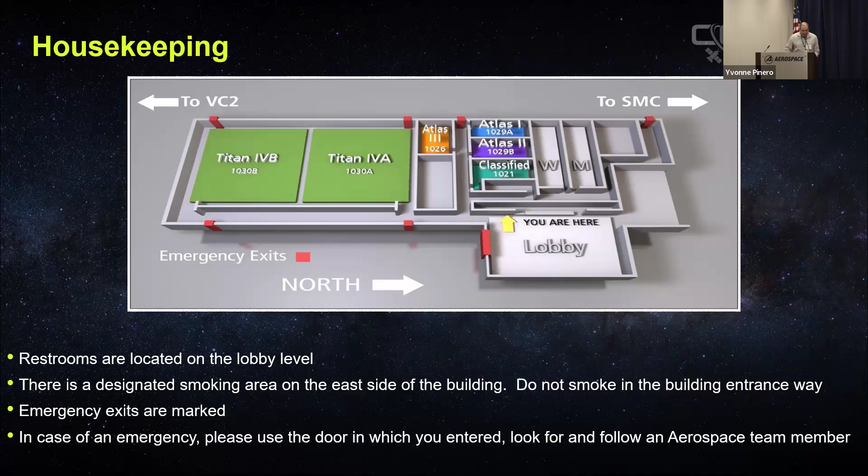All right. We are Cosmic, and this is the Cosmic Capstone Challenge. This is the final showcase, starting today and running through Thursday. My name is Jacob Rome. I've been managing C3 for the past several years, and let's roll. All right, next slide.

Okay, so introduction, ground rules. We're excited to have you, whether you're online or in the room. If you need anything or have any questions, post in the Zoom chat, or you can reach out to myself, Alec, or Rachel. Rachel will also be very helpful and keep posting links in the Zoom. If you're attending in person, please be respectful during the other presentations, even if they're not in the room here. We should not be having conversations in this room. Next door here in El Segundo, there's an empty room if you want to do that.

Okay, so there'll be a lot of people attending eventually. We're going to limit it so only presenters and judges may come off mute. So if you're an audience member and you have questions, put the questions in the chat. If you're a judge, you can come off mute and ask or raise your hand. Others are encouraged to post questions in the chat, and we're going to stay on schedule. Unfortunately, we had a couple teams drop out at the last minute. We're just going to leave those times open. If one presentation finishes fast, we're going to wait till the assigned start time for the next one, since a lot of people have this on their schedule. Okay, next slide.

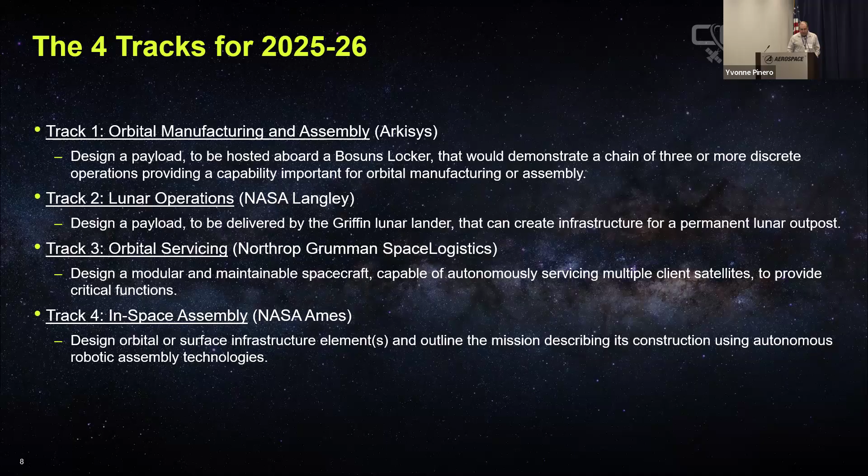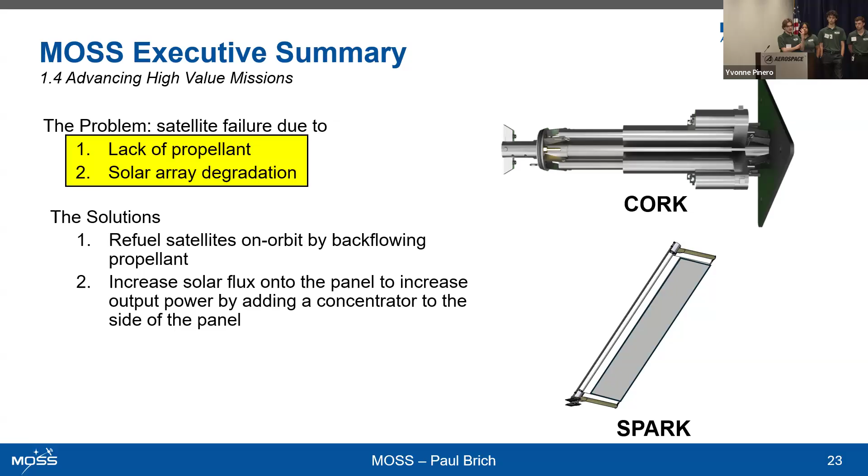We are trying to propose two solutions to service these issues. One is the Core Orbital Refueling Kit, or CORK, and the second is the Solar Panel Augmentation Reflector Kit, or Spark. CORK plans to mount to the engine of the satellite and backflow propellant through the engine to the fuel tank to refuel it. Spark is a deployable reflector shield that can be placed on the client's solar panel to reflect more sunlight onto the panel to produce more power.

This is an illustration of our proposed mission. We plan to launch, get into geo orbit, maneuver to the client, and perform both servicing operations.

If our mission has us servicing multiple satellites, we'll perform a maneuver to get to the second client and perform these servicing operations again. The moment we run out of Sparks to deploy or propellant to refuel the client, we will then move safely into a graveyard orbit away from the clients.

These are two animations of the servicing operation. On the left, we have CORK refueling the apogee kick motor of the GOES-R, and on the right, we have MOSS mounting Spark onto the solar panel and deploying it out.

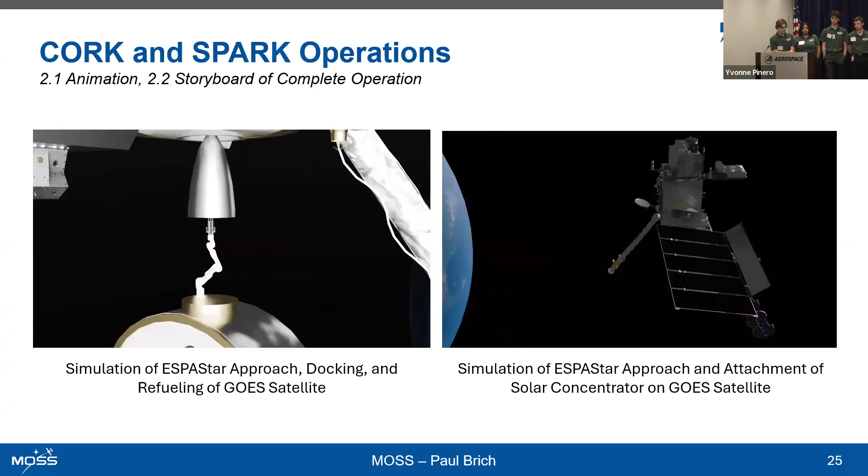Now I will pass it over to Chanel to talk a bit more about CORK. Thank you, Paul. I'm going to be going over the Core Orbital Refueling Kit, CORK.

I'm going to go over the design history, the impact, the requirements, the operations, the innovation, and the risk and mitigation.

With the design history, there were many different concepts, but we decided to share these three today. With Drill B, the idea was to reach the client's spacecraft and drill directly into it. We didn't love this idea since it would damage the other spacecraft, and we want to do it in a non-invasive way.

The second option was the Northrop Grumman MEV 2.0. They attach to another spacecraft and give it a new attitude control system. Yes, it does expand the lifespan of these satellites, but it doesn't solve our issue about refueling in space.

The last concept we want to share was the RAFTI 2.0 by Orbit Fab. It's designing a refueling interface to install before satellite launch, so it only solves for future satellites and doesn't address our current issues with satellites already in orbit.

For the trade studies, we had many different concepts, but we focused on showing these three today with CORK. We looked at damages, complexity, manufacturability, mounting, adaptability, and repeated use. As you can see, CORK won by 86%, mainly focusing on manufacturability. It's pretty good to manufacture, and the adaptability means it can be used on many different nozzles, not just for one spacecraft. We're able to adapt it to many different nozzles, engines, and spacecraft.

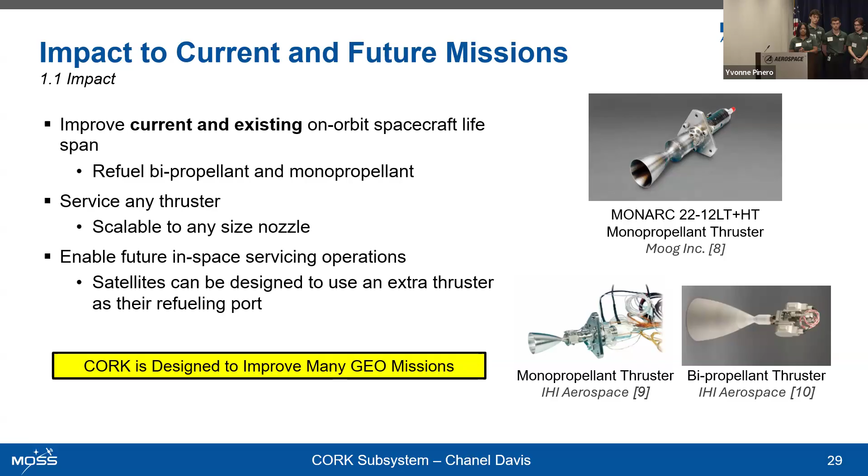Our Cork requirements, we have 8 of them, but our big main ones are 0.1, 2, and 3. We want to be able to backflow propellant through an engine without damaging the client's satellite, to do it autonomously, and to fit onto ESPAStar within the mass, power, and volume constraints.

Here's the operation of Cork and how it works. As you can see, there's docking and sealing. We line up to the client's engine, and once we are docked, we start backflowing the fuel.

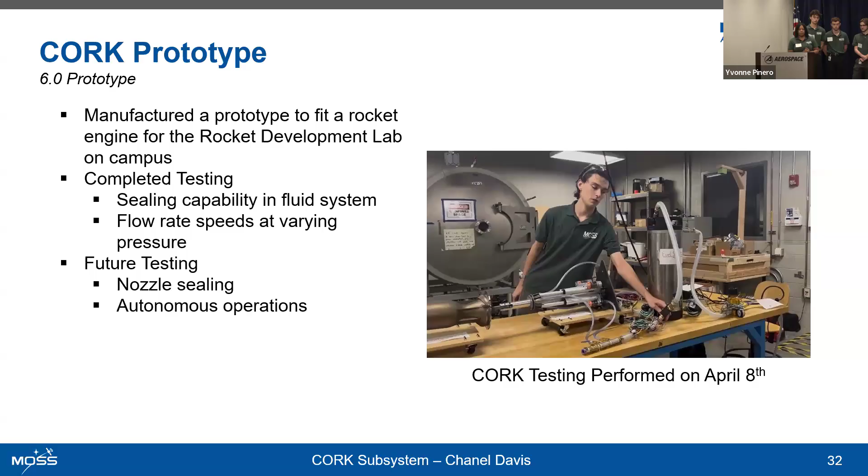Our core innovation is backflowing through the chamber, which is unheard of in space. No one has done it in space yet. So that's why our design is unique and different.

The catalyst integration is another innovation. The reaction rate of the hydrazine decomposition is minimized, and when the temperature is minimized, the mass flow rate is maximized. As you can see in our CFD, with the catalyst and the backflowing, it should work in space.

We have 4 risks, but the only one I'll address today is the catalyst reaction, because it caused pressurization. To minimize this from 4 to 2, we have our CFD simulations and future testing to see how that works. There are also 3 other hazards we addressed and analyzed, finding mitigations to eliminate the overall risk of our project.

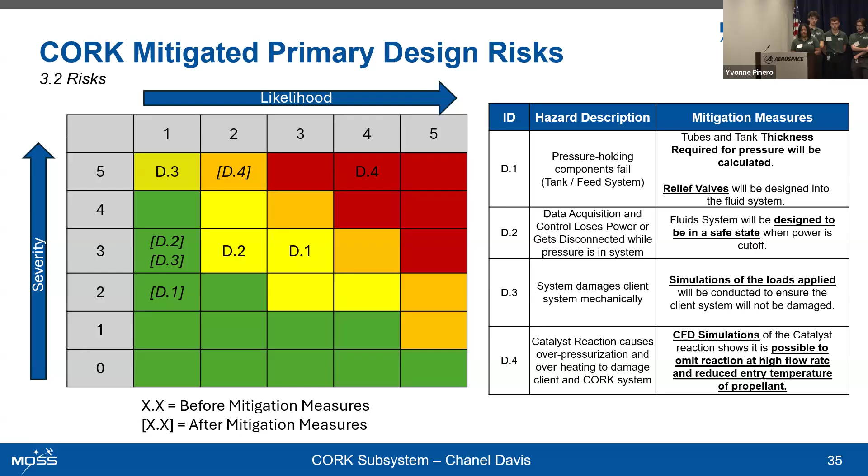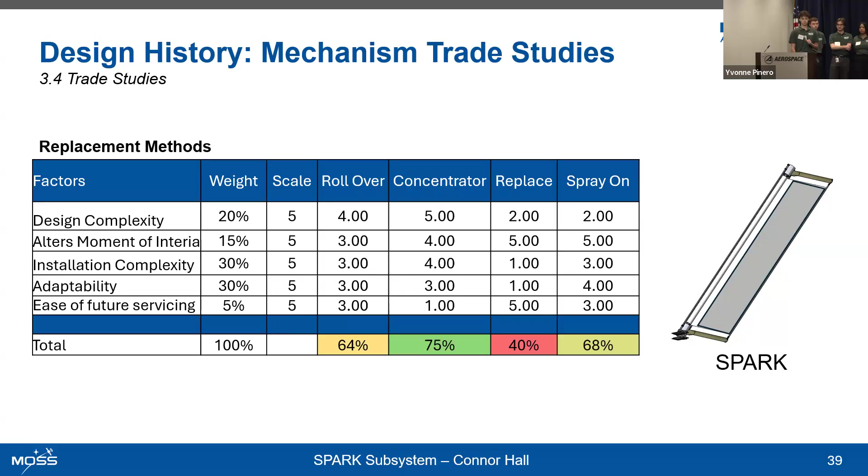So the Spark device would also be compatible with current and future geosatellites. It would also be easily modified to service different missions. So we could just change out the length, put on maybe a thicker roll, and it could deploy for a bigger array, for example. And then it would also increase performance without need to integrate into the power system whatsoever. So it would be a rather simple concept to mount on and actually get to work. Next slide.

All right, so some of the Spark requirements. We had a few main requirements. One is that we need to reflect at least an 11% additional light increase onto the solar panel. We also need to make sure that we don't increase their station keeping. We wanted to target around 5% of the actual nominal capabilities of the client.

And then we also need to make sure that we don't break the solar array whenever it's doing maneuvers, and we don't crush the solar cells that are on the actual array that we're mounting to. We also, much like CORK, wanted to integrate requirements to make sure that we could fit the volume, mass, and payload constraints in general for the ESPA-STAR satellite that we are hoping to use on MOSS.

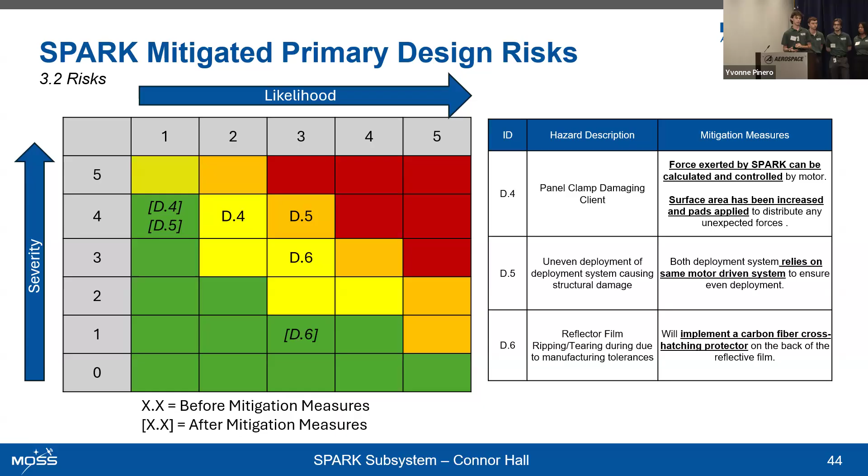For the uneven deployment, we did implement a common drive shaft between the 2 booms, so they will always deploy at the same rate. And then for the reflector film, we are going to implement kind of a carbon fiber or fiberglass weave on the back. So if a rip does start, it would be terminated at the intersection of the weave and the foil. Next slide, please.

So what are the next considerations for the Spark design? Well, we want to look more into the incident angle efficiency losses. So we want to propagate the client for each mission around the Earth and around the sun and find the average incident angle that would be hitting the solar array and then design optimally for that incident angle. So change our reflector mount angle to make sure that we're getting the best reflection onto the actual panel.

We also want to look more into our reflector material. Currently, we have aluminized mylar as our choice, but I believe that we can find a better reflector that would reflect the 400 to 1600 nanometer wavelength band that gallium arsenide panels like to absorb.

And then third is the heat degradation from increased sunlight. So we want to look into exactly if we do put more solar flux onto a gallium arsenide panel in space, how does that exactly affect the lifespan of that panel, and what does the degradation rate look like if we were to reflect more sunlight onto it?

And now next up is Brendan King with integration and feasibility. All right. Thank you, Connor Hall. And I'll be going on to a little bit more about how all this integrates within the overall MOSS system.

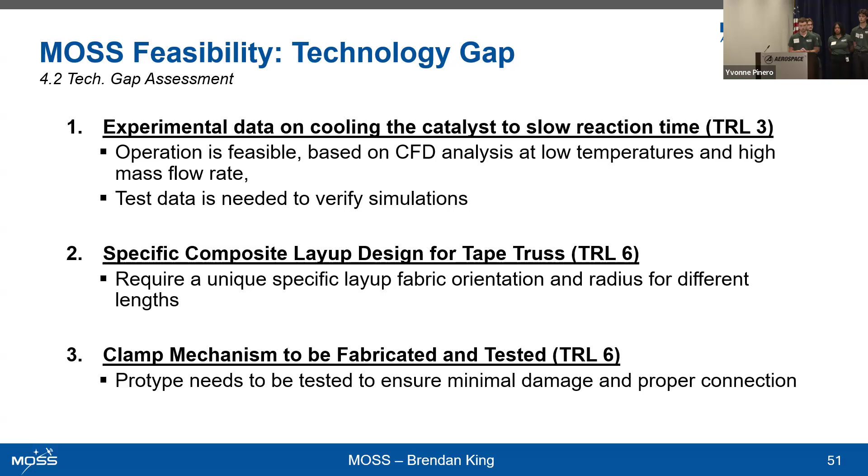And then as well as the clamp mechanism, we have to make sure that prototype is tested and built to ensure that we have minimal damage or proper connection with our client satellites that we are servicing. Next slide, please. In terms of our mission costs,

Next slide, please. And so how this compares to say a GOES-P satellite or GOES-R satellite, we come in at a savings of around $128 million. And so this is great because it shows not only our solution can save money, but it also allows that satellite to stay up in space longer, reducing the need for, say, sending up an entirely new satellite to replace that satellite. We can just directly go in there and service them and keep them up there longer, which definitely reduces the cost. And so we deem that our CORK and SPARK solution has potential to save the industry money as well. Next slide, please.

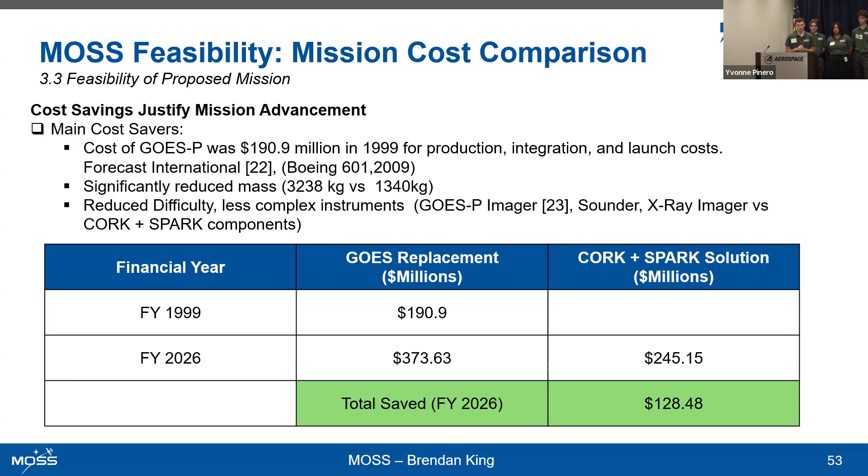Looking at our final summary. In summary, MOSS servicing will include our CORK and SPARK operations, which will tackle our rank 5 and rank 10 tasks of on-orbit refueling kit and solar panel augmentation. For CORK, we'll be backflowing propellant through the satellite thruster to refuel hydrazine fuel. We'll be able to service any GEO satellite that has a hydrazine thruster. And again, the servicing design has never been done before, so that's where our innovation really kicks in.

In terms of Spark, we'll be adding a reflector to increase our solar flux on degrading satellites. We'll service any GEO satellite that has a solar array. And a similar design has been proposed, but never been fully designed and implemented. Again, showing that innovation. Next slide, please.

In terms of our future work in our path to PDR, we plan to finalize client platform, specialized design inputs. For CORK, we want to complete our catalyst analysis and potentially get experimental results to support our findings. We want to perform space environment dynamic simulations to make sure that we are able to conform to our space operations in that space environment, which is very dangerous. In terms of Spark, we want to develop and test our deployment mechanisms and go through these other things that we have listed here as well, and deliver a full scope preliminary design review.

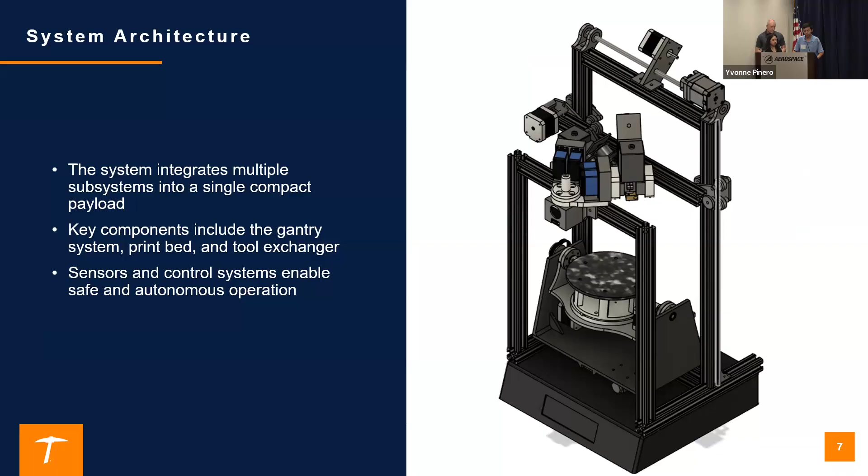Where's the control for this? All right, so

Excuse me. So a big inspiration for this is obviously additive manufacturing. Some of the processes that we chose, 3D print, wire embedding with the 3D print, and soldering, even though they are very similar processes, they do require different tool heads in order to make that happen. So we looked very hard into how we are going to change those tool heads. Of course, we wanted to come up with a very rigid design to eliminate any kind of slop.

So right here, we just kind of got a concept of how that would function, how that would work. Obviously, locking keys that would mate up with our alignment slots to pick up the tool off of our rotary exchanger. Then that rotary exchanger would swing the unused tool out of the way for our desired printing operations. Next slide, please.

There's just kind of an image of our gantry system, once again inspired by 3D printers out there. This is the backbone of our operations. We plan to have it run off of timing belts. And this portion of it is what is going to give us our translation in the X and Z axes. Next slide, please.

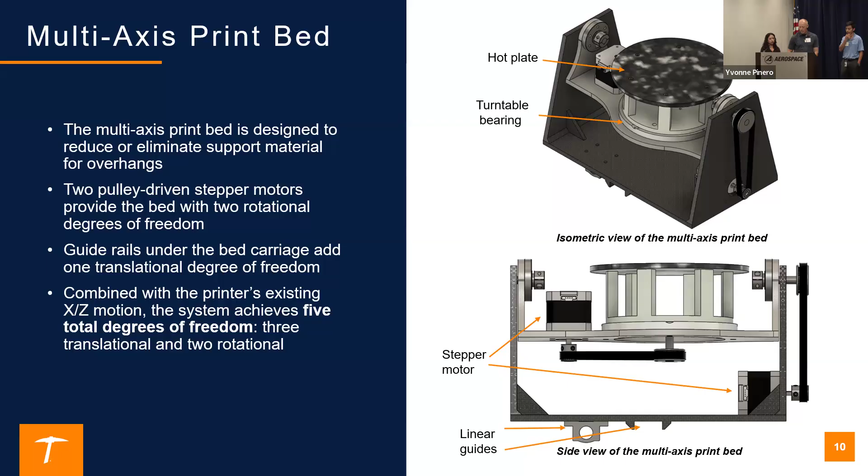The hot plate will be able to rotate 360 degrees. It also has a tilt mechanism, which we know from our CAD will give us at least 20 degrees of tilt, both positive and negative. So we think we can get some pretty interesting design geometries out of that. It also translates back and forth in our y-axis. Next slide, please.

The rotary tool exchanger, obviously the other important component here. Not only does it store our tools to keep them from floating around inside of the bosun locker, but it shifts them in and out. We wanted to make sure that this was designed pretty robust, and it's integrated. All right, next slide, please.

All right, so for our risk, we use kind of the standard model, likelihood versus consequences, to identify our risk with this entire system. They really focus into 3 main categories. One is thermal, temperatures and keeping that under control. Of course, the laser and keeping that in safe operating conditions, and then FOD.

We're looking at working with soldering. We're looking at using filaments for our 3D materials, and of course, the embedded wiring, making sure that's clipped and cut so we're not having any foreign objects floating around inside of the locker. We believe we can mitigate most of that through our testing on ground, in the vacuum, and with our next steps. All right, next slide, please.

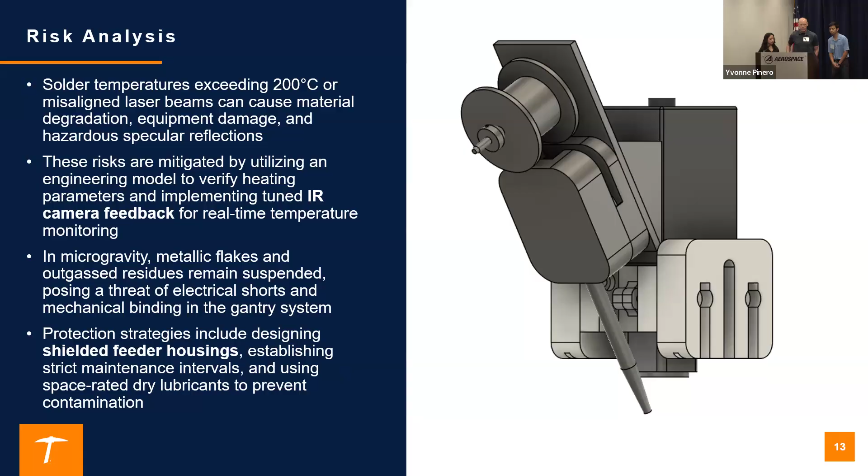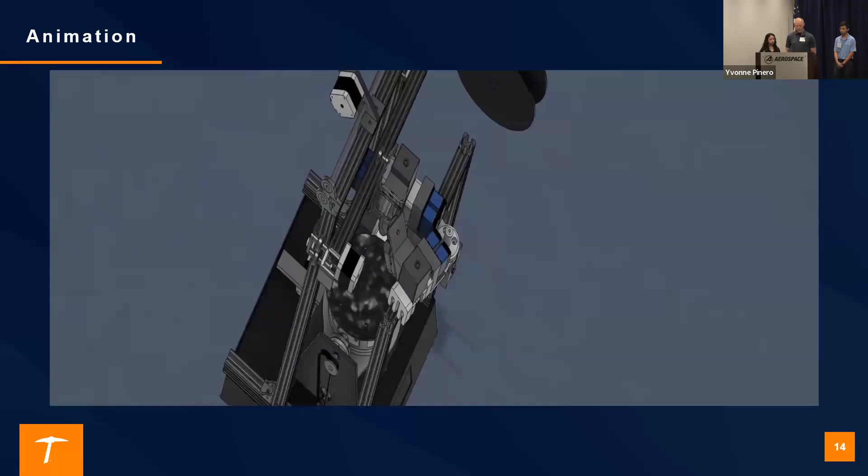We have an animation right here of the locker. You're going to see this thing spin around, and you'll notice our print bed rotating, bringing our tool head down to conduct its soldering operations. I tried to capture here an image of the trading of the tools.

Guess we're going through the animation one more time. All right, so this is the storyboard for our concept.

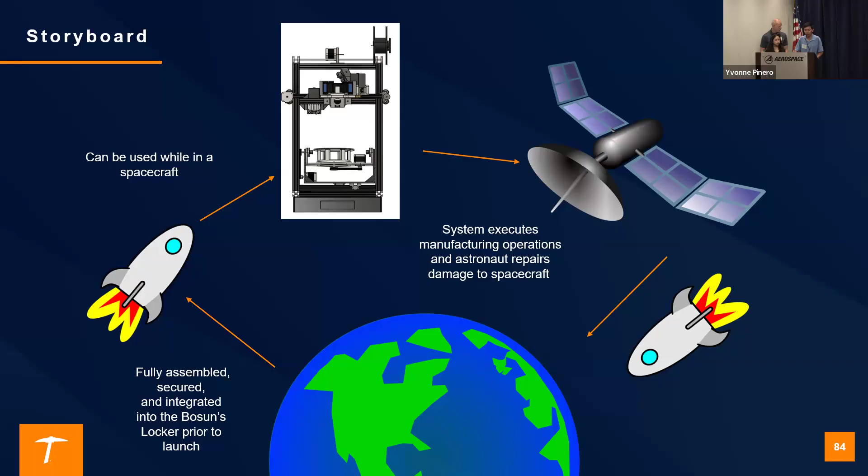While we're down here on Earth, we'll fully assemble and secure the bosun locker prior to launch with all the integrated subsystems. Then we'll launch it up in a spacecraft, and it can be used while in a spacecraft to produce any manufacturing operations - that could be damage to a satellite, damage to a spacecraft. We can also adapt it so we can host it on any hubs in space, like the ISS or other hubs. Then it can either stay in those hubs or stay in the spacecraft and come back down to Earth as well.

So this would be our results for this project. We have the thermal simulation, the power consumption, and also our FEA analysis.

So this would be our power analysis. We broke down our components and calculated the max power and the general operating power. One of our requirements was to ensure the system was within its limits of 1000 watts peak and 300 watts continuous. We calculated that the total maximum power was around 430 watts, and our general system power was around 150 watts, so we were definitely under those limits.

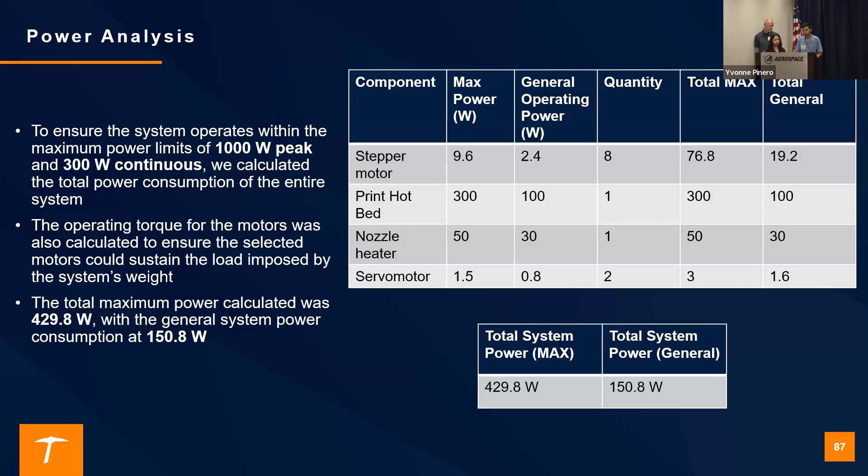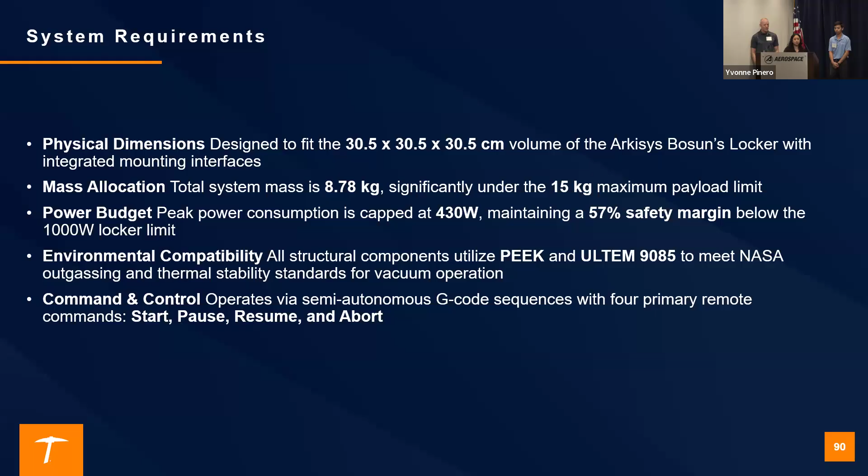For our trade study, we guided our decisions based on performance, reliability, and simplicity. For the structure, we decided to go with aluminum for strength and thermal performance. For thermal management, we decided to go with passive cooling to reduce complexity and power usage.

For our motion control, we use stepper motors to achieve precision without adding unnecessary cost or weight. And we developed a simplified rotary tool changing system to reduce mechanical risk. We ended up going with additive manufacturing, FDM, to minimize material waste and allow the complex internal geometries needed for integrated wire embedding.

For our control architecture, we enabled the system to operate reliably and autonomously. At a high level, we used dual controllers set up to handle motion control and processing efficiency. Our system integrates real-time sensor feedback to maintain precision and prevent errors during operation. It operates semi-autonomously, executing complex tasks using simple command inputs, and we designed it with separate power systems for stability and standard communication interfaces for monitoring and data transfer.

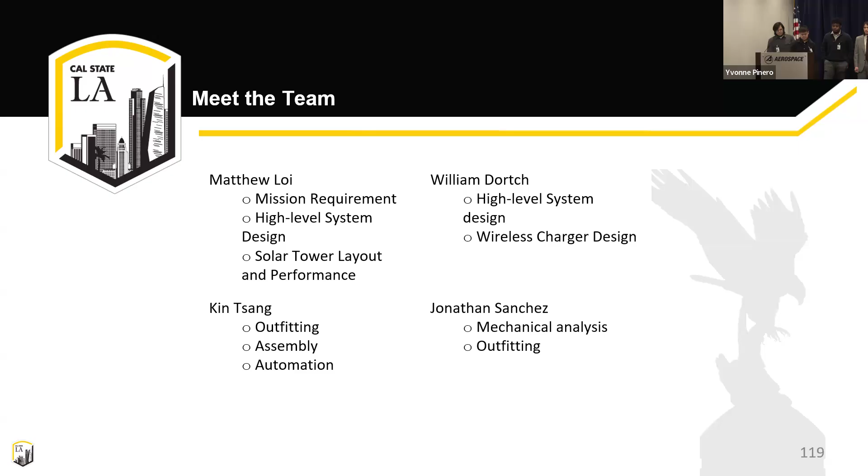So to start our presentation, we'd like to briefly go over a summary of what we're going to be talking about. For one thing, we'd like to talk about some problems we want to address, mainly that right now the Artemis missions on the lunar surface are mainly based on trying to extract resources and convert them into reusable energy sources, or turn them into air or fuel.

What we're trying to target is the short operational and mission time of exploration rovers on the lunar surface. We want to address the fact that these rovers will have to enter extremely deep craters where there's no visible light at the bottom. We're also addressing the fact that solar panels currently degrade pretty quickly on the lunar surface due to dust accumulation.

So our solution is to autonomously assemble a structure to generate power and store energy for long-term use, which will then be utilized by a wireless charger to charge rovers.

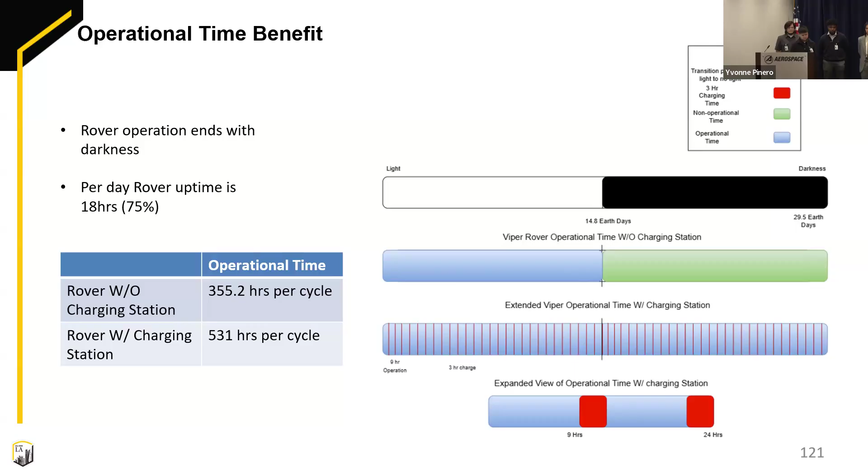To go over some benefits of our system, using NASA's Viper rovers as a baseline: they are currently self-reliant on a solar panel system. During the lunar cycle, when we eventually lose sunlight, the rovers essentially enter a hibernation state until the next period of sunlight when they can operate. Our proposed method of generating and storing power allows us to increase operational uptime to approximately 18 hours every Earth day, a 50% increase over the Viper rovers' current uptime of 12 hours.

Next, we'd like to address some locations and environmental issues. For our project, we wanted to target the Shackleton crater. Due to the depth of this crater, there's essentially no light, known as a PSR, or permanently shaded region. We're going to be placing our project at location A, approximately 89.68 degrees south, 166 degrees west, which is a peak of eternal light, meaning it experiences more sunlight than every other place, with the longest period of darkness only being about 7 days.

Next, I'd like to go over the requirements of our project. These requirements were developed based on the Viper class rovers in terms of the total amount of energy we need to store and how much power we need to generate. Along with that, we've also considered environmental constraints, such as lunar dust accumulation.

All right, so our building block for this is going to be the ARMADAS voxel. It has a cuboctahedral configuration, 1 foot by 1 foot by 1 foot, so the overall volume is 1 foot cubed. To assemble these structures we use the SOLL-E, whose purpose is to transfer these building blocks to the robot, the MMIC-I, to go ahead and connect and mate them once we provide the code and structure design for it to get programmed and assemble these together.

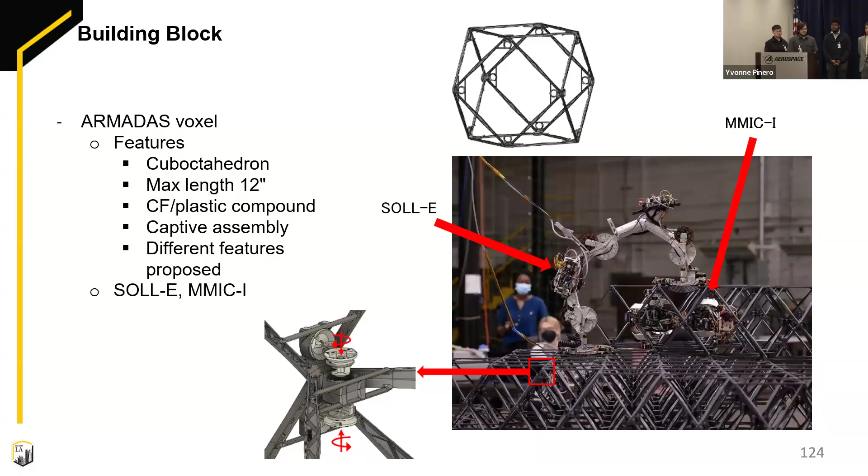So now I'd like to go over some trade studies on how we developed our project. First, the different battery storage technologies to store all that energy for the rovers to use. We compared different materials, but the most important one was lithium ion, as that's currently being used. We compared it against solid state batteries, lithium sulfur, and sodium ions, and found that the solid state battery was the most optimal solution due to its higher energy density, allowing lighter batteries that we could transport into space, along with its higher life cycle, meaning we can effectively recharge and discharge it twice as many times as lithium ion.

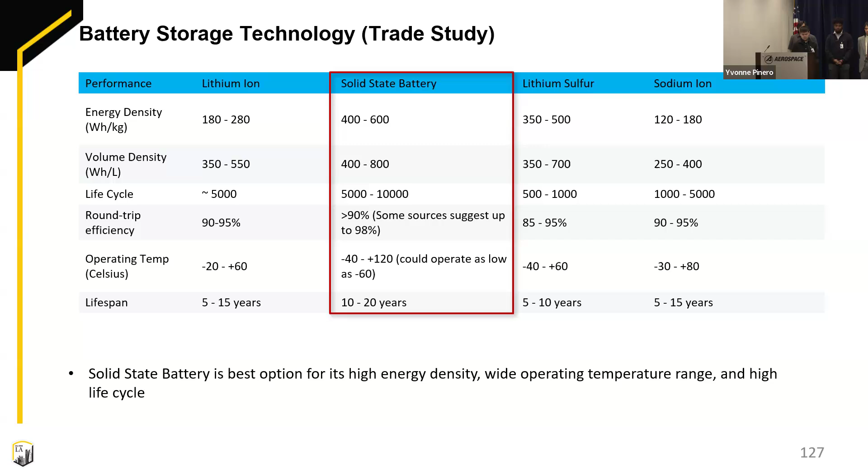Next, I'd like to go over power generation and panel orientation. We looked into different ways to generate that power. Our first option was reflecting sunlight into the crater, where we would place solar panels to generate power. We also looked at adding a heliostat to track the sunlight, and NASA's current mission of developing nuclear fission reactors. Lastly, our chosen method, which we are going to use, is generating the power at the ridge of the crater and using a transmission line to deliver that power down into the crater, into our batteries and charging station.

As for the solar panel orientation, we looked into different form factors: a pyramid, a cylinder, and a block, which is what we're calling it. Each design would have its own unique panel tilt, the pyramid being 45 degrees, the block and cylinder each having 88.5 degrees to have the perfect angle of incidence with the sunlight coming in.

But the main thing that caught our eye for the block was mainly the fact that it required the least amount of voxels, so it wasn't that complex to assemble. Next slide.

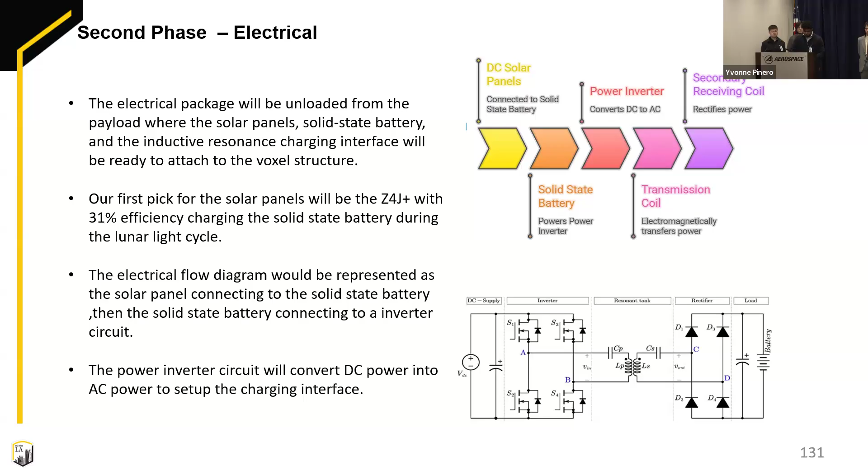So what's really important about designing your charging interface and having an inductive resonance charging coil is essentially the coil geometry, as well as your materials and how you want to use your coils. It's important to emphasize having a good quality factor. This basically determines the range, an intermediate range or a short range, for how you want your electromagnetic wave to propagate in space in order to create effective charging or magnetic coupling.

And understanding that based off of our quality factor, you want to be able to minimize losses, but also have high switching, so that way you can have a high level of reactance. So you can go to the next slide, please.

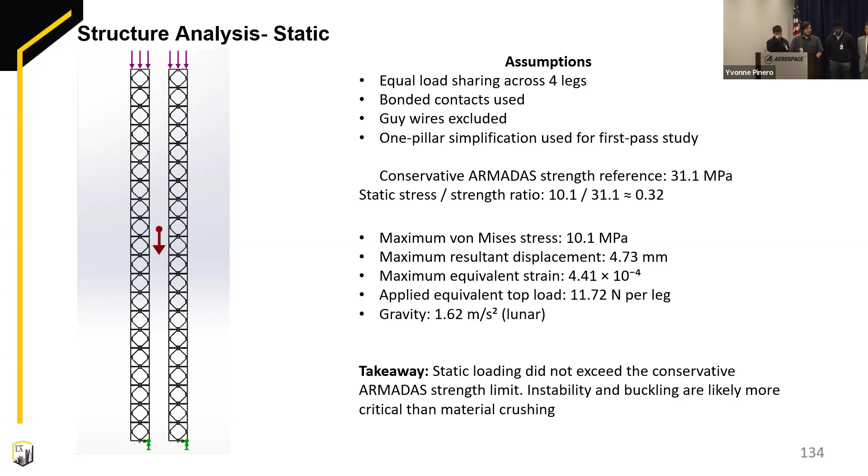So analyzing the buckling strength here, given the output of 1.34 for a buckling factor, it is a little bit concerning that it's getting close to failure, say 11.72 versus the 15.72 of a critical load. So it is concerning that it may experience a failure over time as it accumulates weight with dust or anything of that sort. So another solution that we have was the guy wire, which also helps relieve the stress from the building itself. All right, next slide.

And for the active thermal management of the battery and the components, we're pretty much using the electric resistance heater, mainly because it's a pretty simple unit. There's a lot less for a mechanical failure to occur, and that can't be said for the heat pipes, exchangers, and the liquid circulator. Compared to everything else, those were a lot more complex, and the biggest factor is that they draw power. If we're trying to conserve power, you don't want a lot to go to waste just keeping the battery and the components in a stable temperature range. Next slide.

So now that we've defined the parameters and also the model of what we're trying to build, we are going to have to actually build it. And as mentioned before, we're going to use robotic agents to do it. But more importantly, what I want to discuss here is automation. Why are we automating this? Because number one, of course, this is track 4 and C3 requirements. More importantly, though, the point of C3 track 4 is that we want to automate lunar manufacturing to do 2 things.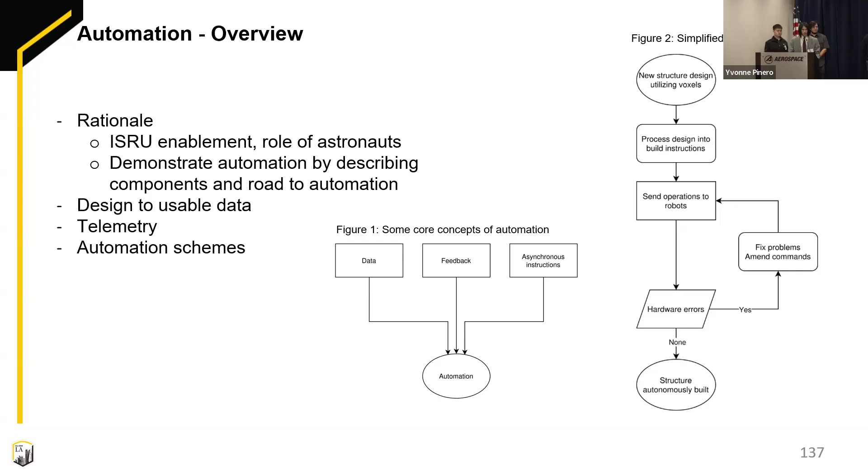So first things first, the data we're going to put into it is the project design. We're going to break down the project design into special code, as in figure 1. We break that down into numbers that machines can understand well. And so we take each position of the voxel, and we assign the center coordinate of it to a point. Then we can convert all this into something that machines can understand, and then we copy that to the robots themselves.

The robots are loaded with a routing algorithm, which is to say, it will find the best routes going from one point to another point.

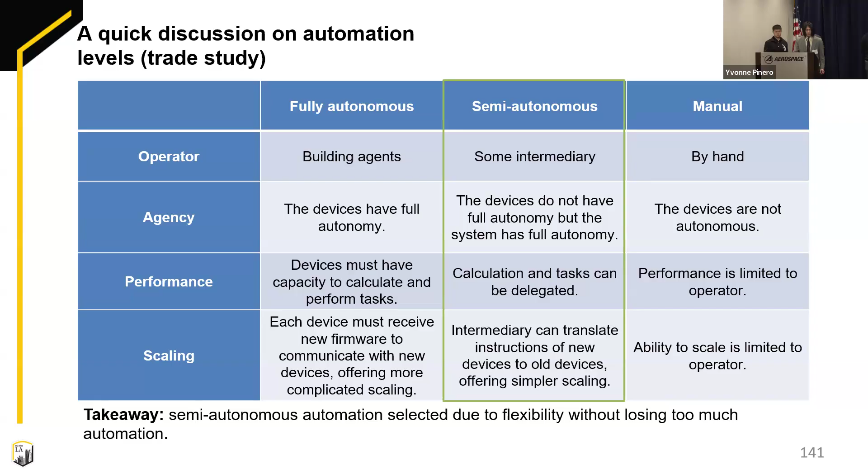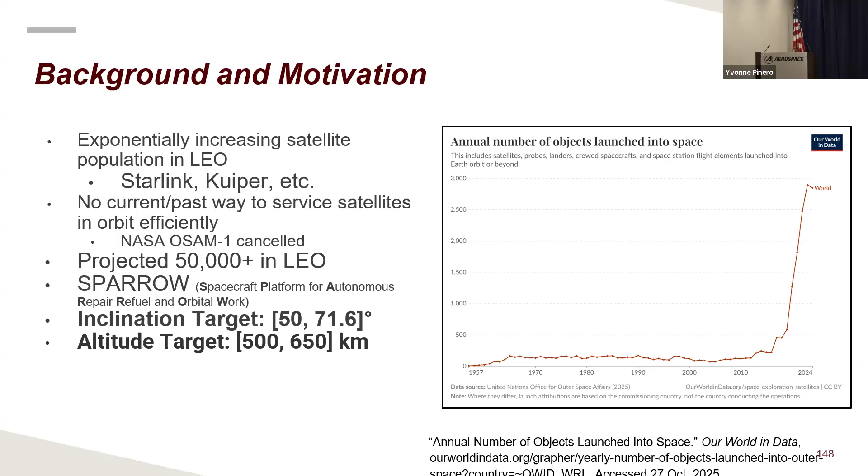And next slide, please. So what will Sparrow do? It will perform critical servicing functions on the client satellites. So that will be things like upgrades, repairs, refuels, pretty much anything that will help extend the lifetime of our client satellites. And how it will perform those servicing functions: it is a modular spacecraft, so our payloads are hot swappable and customizable depending on what the clients need. And our main payload that will be performing those functions is the robotic arm. Next slide, please.

Next slide, please. So here is our success criteria. If all of these things can be completed, then the mission will be considered a success. For autonomy, we need at least 90% anomaly resolution success, which is just off-nominal conditions that the onboard computer and AI should be able to handle. We also need to be capable of servicing at least 2 clients per mission. Even if the mission doesn't call for it, we must have that capability.

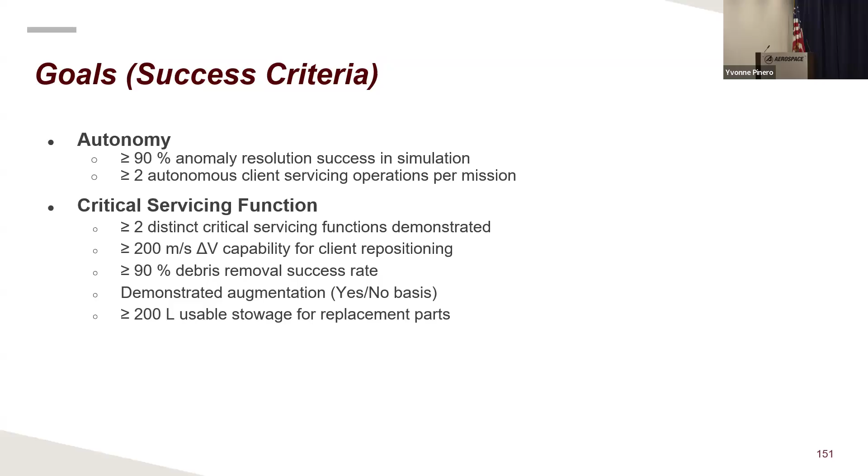Next slide, please. So now this graphic represents our concept of operations. If you look in the top left corner of the graphic, that is where it starts. The spacecraft will be launched from Earth, placed into its parking orbit. From there, it will use modular payloads and the robotic arm in order to service our client satellites. If you look at that bottom right corner, the third part, the satellite must be capable of transferring between our parking orbit and the client orbit in order to rendezvous with the satellites.

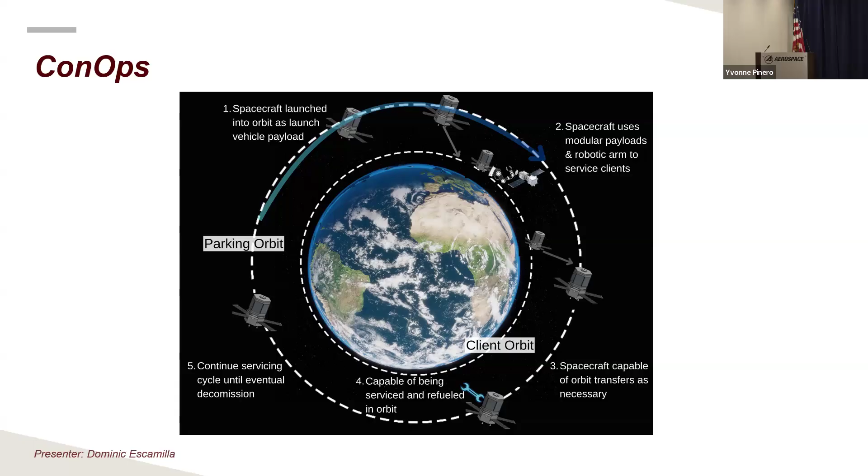Howdy, I'm David. I will be going over the Sparrow and its general structure and design. Could I go to the next slide, please? So this is Sparrow. This is our hexagonal prism shaped spacecraft. We have a 4 solar panel array system and 2 robotic arms on a track that will have access to all faces of the Sparrow, and will be able to access all the modules, which you see in the dark gray on the top section. On the right, you can sort of see a skeletal view of this structure, and we have segmented it onto the next slide, which demonstrates 3 primary segments. If you could go to the next slide, please.

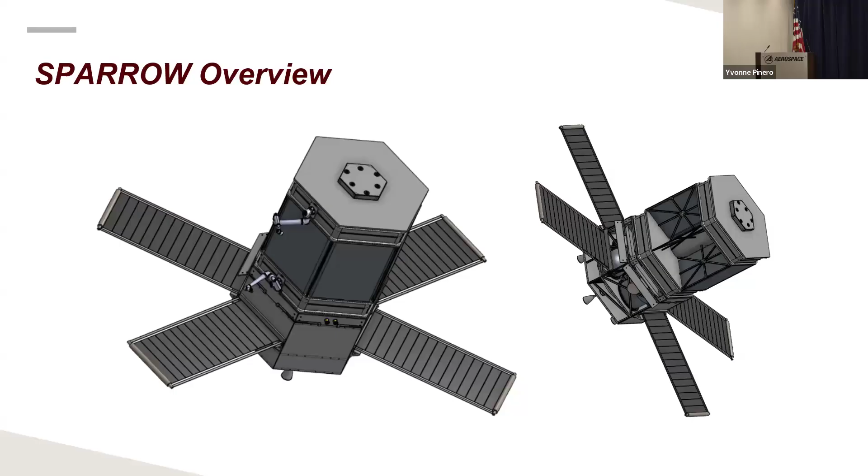So the primary segments are the propulsion structure, the avionics and computer structure, and the servicing module structure. The propulsion structure contains 4 tanks, 2 propellant and 2 oxidizers. The avionics system will also have stowage space as well as the avionics and computer systems. And then the top section will contain 2 tracks with robotic arms on them, which will operate on rails to service all sides of the satellite, and also contains the modular compartments themselves, of which what is contained in the structure will be determined by the client. Next slide, please.

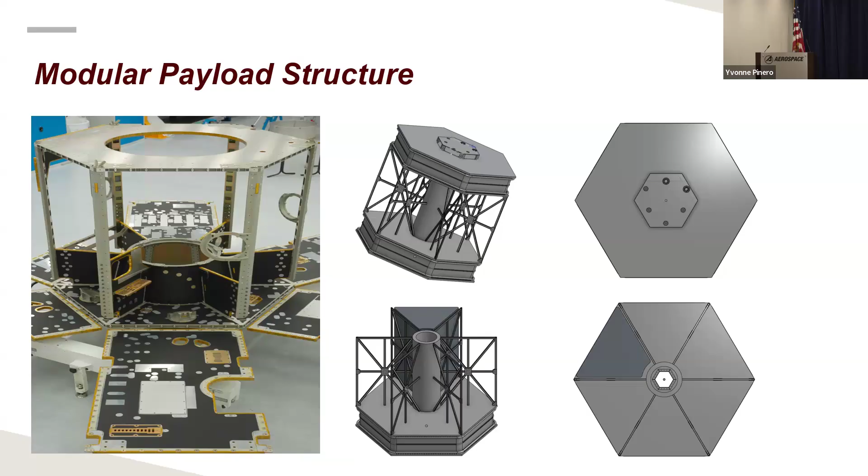And following a similar concept for the electronics bay, each panel is removable so that all the electronics can be accessed, as well as everything that is stowed there, like bits and other electronics and replaceable parts. And that is the structure. And so on to our next section.

Howdy, I'm Nate. I'm part of the GNC team. I'll be talking about some of our rendezvous and proximity operations simulation that we put together. Next slide, please. So we used a software called Basilisk to put this sim together, and we modeled a 6 degree of freedom rigid body dynamics.

And we have our ADCS in the sim, and all we did was put our actual sensor noise into our ADCS from our data sheets. That way we can analyze the capability of our ADCS during the sim.

Some of the requirements we had were that our attitude error was within 3 sigma, and our angular rate error was within 3 sigma of those data sheet specifications.

I'm Juan, and I'll be talking about the determination of optimal maneuvers for orbit transfers. To determine the optimal transfer for our satellite, the Rishi client satellite, we used the Lambert solver, where we looked at the departure time of our satellite from its stationary or parking orbit, and we also looked at a range of time of flight.

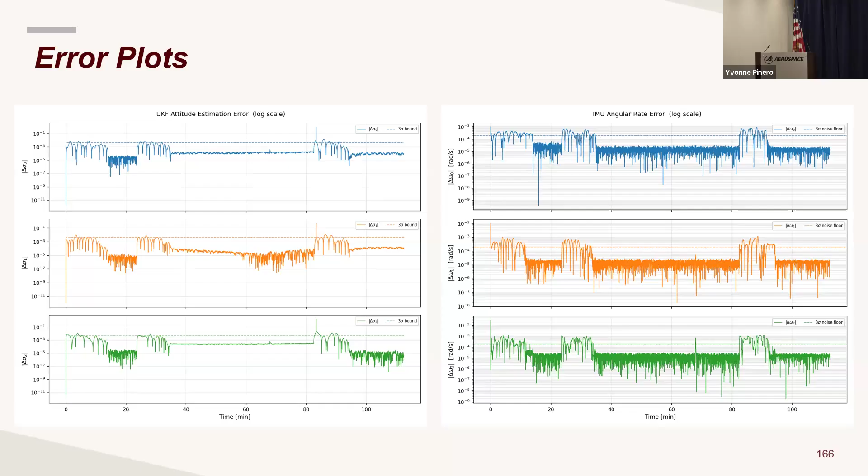Those spikes are due to guidance mode changes. We have several guidance modes: sun pointing, ground pointing, velocity pointing, and target pointing at the spacecraft.

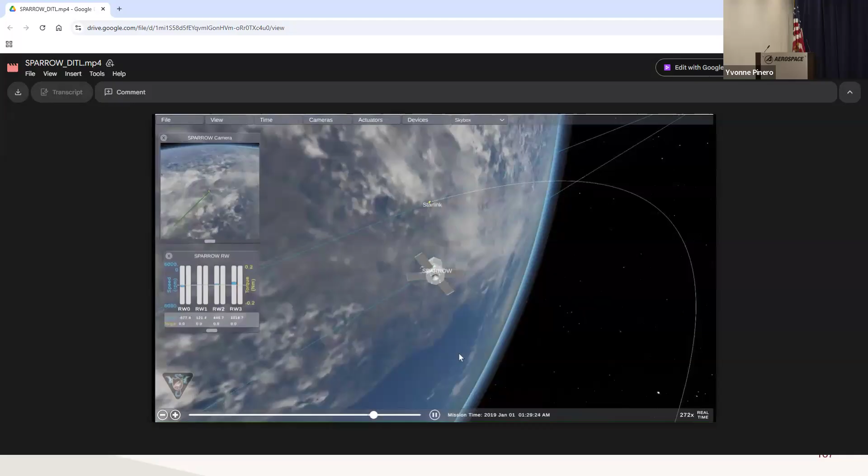Once we reach a relative distance to the target, we change our attitude again to lock on the target with our camera and sensors to inspect and make sure as we're approaching everything is as it should be, in case we need to do any hazard detection or maneuvers.

And then here we just modeled our relative motion using the Clohessy-Wiltshire equations for simplified relative motion. Sorry, I guess it cut out there, but...

In this scenario, the solar panels will be tucked in. The thing is, we used Vizard with Basilisk, and unfortunately we couldn't tuck in the solar panels to demonstrate in this stage.

So then here we'd adjust again so that we make sure our arms are pointed to the servicing target, and we'd have our sensor performing, looking at the spacecraft, making sure everything's okay, and also diagnosing and determining which servicing function we need to perform.

And that will conclude the sim on our part.

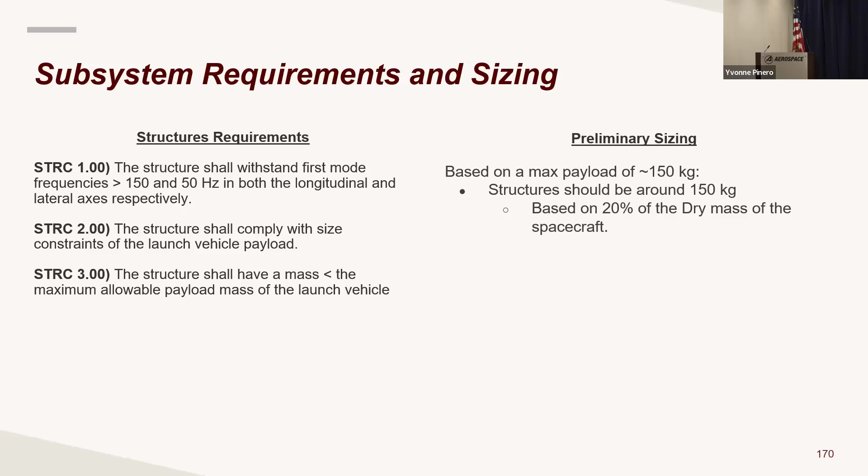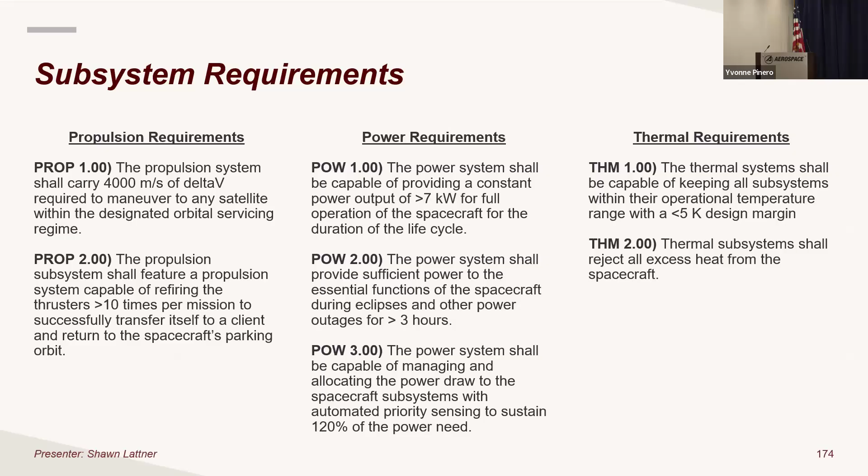For a delta V requirement, our system goal was to autonomously service at least two clients per mission, as well as have at least 200 meters per second delta V capability. We did a couple Monte Carlo simulations, which helped us determine our 4,000 meter per second delta V capability, explained in our subsystem requirements.

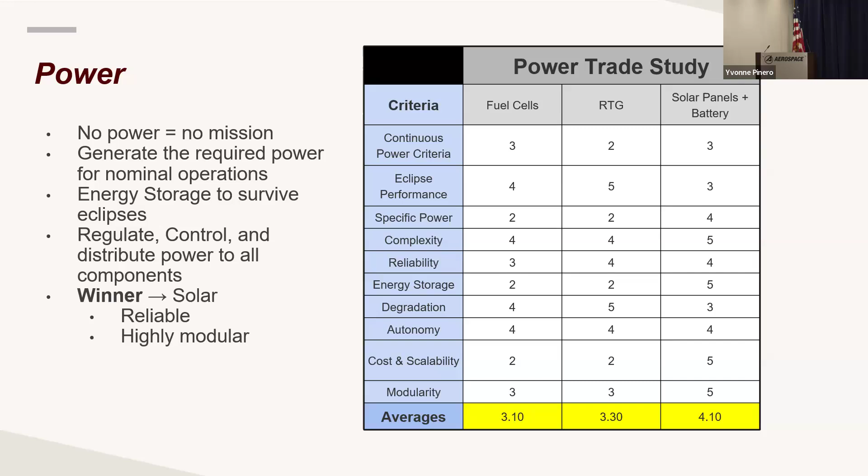That concludes the propulsion, power, and thermal subsystem. On to our next slide, please.

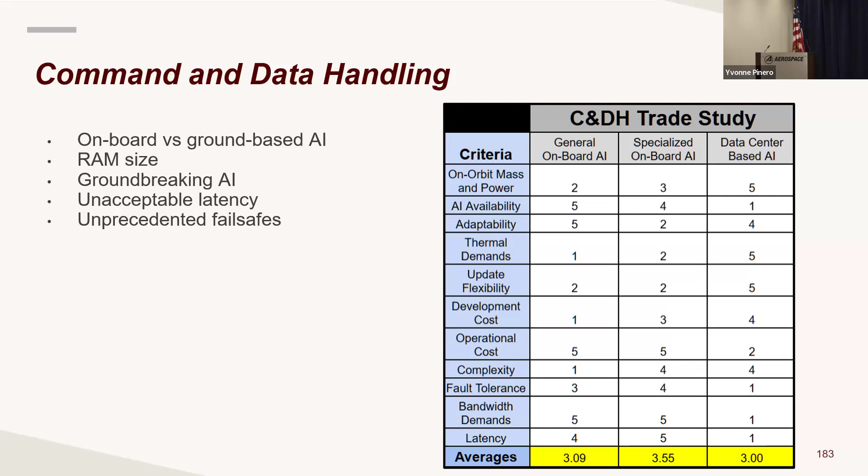For sizing, we looked at the power of our payload to get the power of the total system, and then we did basic parametric sizing to get initial mass and power budgets for the computer systems.

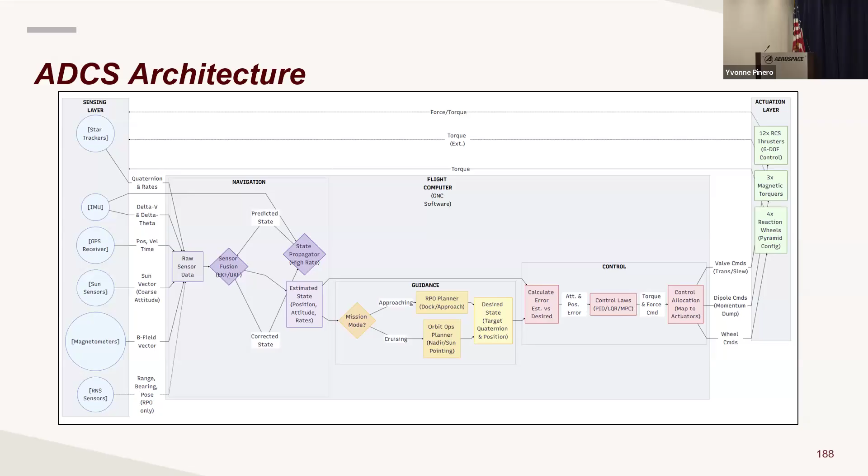This is a closer look at the ADCS system that was active during the simulation you saw earlier. On the left side, you can see the suite of sensors that Sparrow is equipped with, which feed into the navigation UKF, which feeds into the guidance algorithms, which feed into the control. For control, we've got reaction wheels, magnetic torquers for desaturation of the reaction wheels, and RCS thrusters for more fine maneuvering.

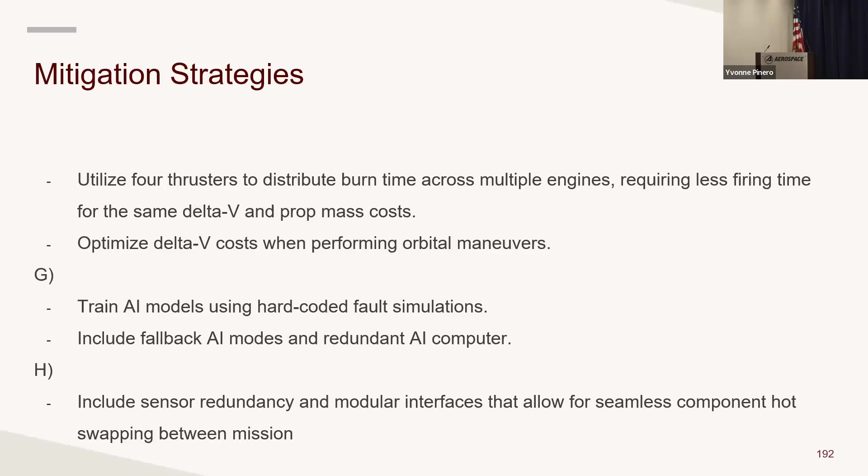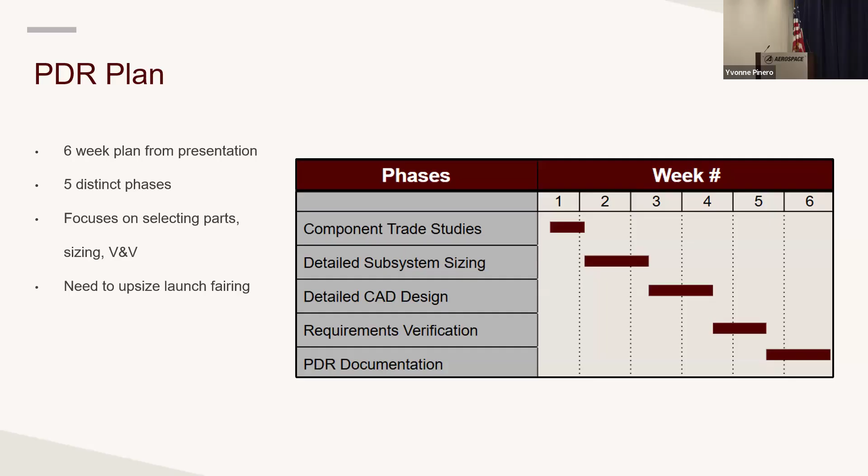If we can go to that next slide, please. Our PDR plan is very standard here. It's going to be a 6-week plan from today. We have 5 distinct phases that focus on selecting specific components and making sure we meet all subsystem requirements, system requirements, and stakeholder needs.

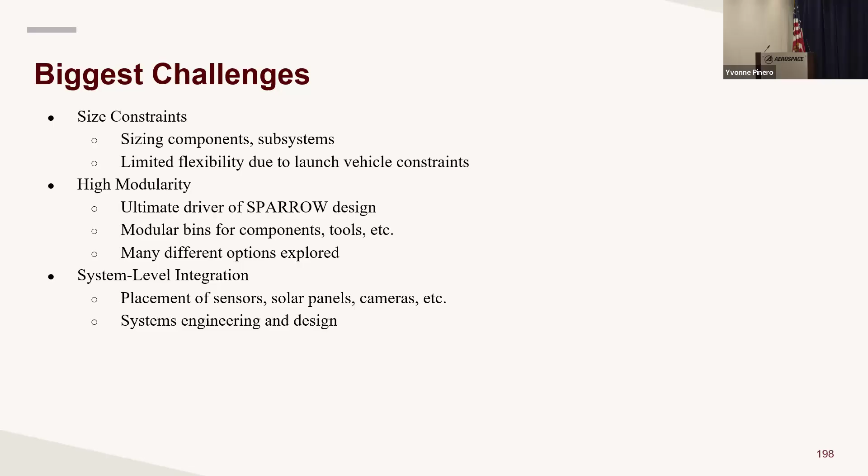And now we have some of the biggest challenges that we came across: the size constraints, making sure everything fits inside of our payload. We did have to increase our launch fairing from the Falcon 9 to the Starship, and also how we were going to do the high modularity, which we talked about. Finally, our system-level integration—all systems engineering aspects of it, making sure subsystems interface, and also keeping a master equipment list and a bill of materials. And that's going to be it.

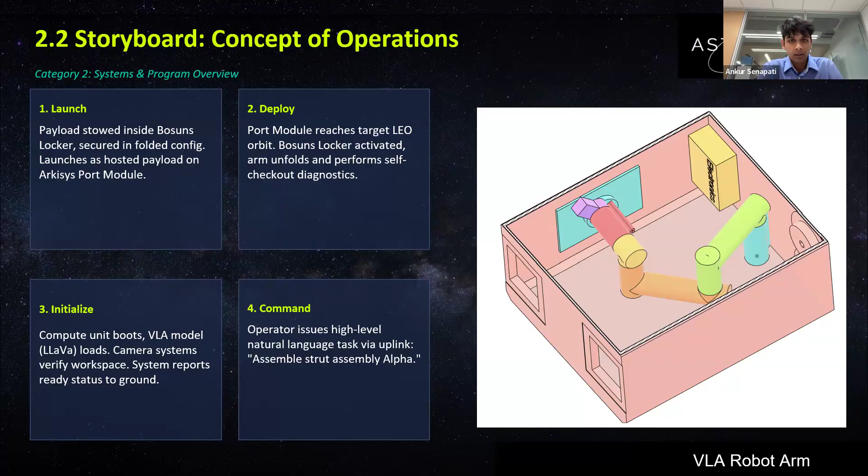Our next 4 tasks include the operations actually performed by the robot arm. So we have 3 main operations, which we'll get to in a bit, which are pick and place, riveting, and also screwing. As you can see on the right, we have an example of the environment, which can be screwed and riveted in order to perform these operations. And then after the robot arm performs this, it will be able to verify and report that the system has succeeded or failed, and then the operator can confirm commands for our next task. Next slide.

So here are the 3 operations that we chose for our system. The first is pick and place. Using this operation, the arm will be able to use camera vision in order to identify a target component. It can then use this tool in order to grab the object and transport it to where it needs to be in order to perform operations. The next is riveting. This is our permanent connection that we chose for our robot. In this case, we're using a low-power self-piercing rivet in order to improve structural integrity. This is what we chose since it does not require pre-drilling of holes in different components.

And our last operation is screwing, which is automatic screw driving using a rotary end effector attachment. This is used as our non-permanent attachment. So this will enable components to be screwed and also unscrewed for further operations. Next slide.

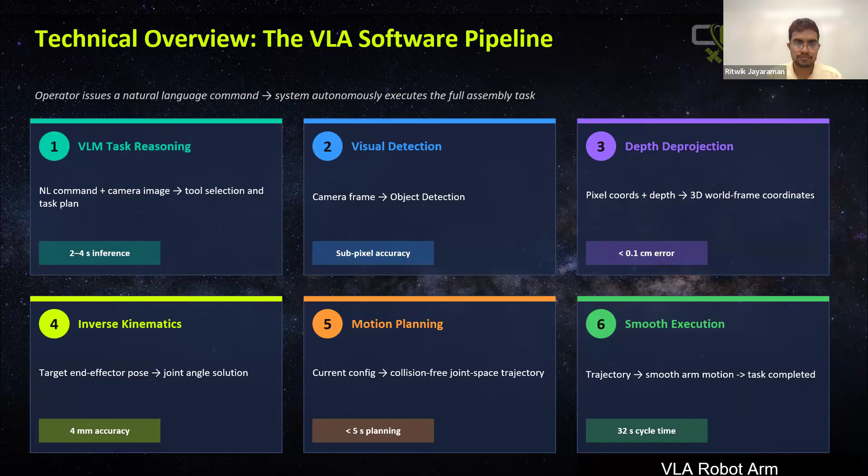In addition to our software pipeline, we also evaluated the feasibility of our mission. Our current proposal complies with the Bosun's locker, not only in terms of space, but also in terms of payload. For mass, we currently estimate around 80 kilograms as an upper bound for our mass constraints, and for power as well, we currently estimate our peak draw power to be at around 250 watts.

Additionally, we aim to use technologies which had a moderate to high TRL level. For example, VLMs and VLAs have been used in terrestrial robotics before, and they are currently at TRL levels 4 and 5. Other operations such as thread screwing are at TRL level 7. However, the challenge is going to be in the integration and adapting these ML inference pipelines to space-related compute, such as using hardened variants of the NVIDIA Jetson Nano, and validating that this pipeline works in microgravity.

Next slide. In addition, we've created a 5-year pipeline to be designed, built and launched. Our first 18 months will mainly be our PDR, where we focus on ground testbed validation and model optimization for edge compute. Then we'll focus on vacuum testing and vibration qualification in years 2 to 3. And then in years 3 through 5, we'll focus on integration with the Bosun's locker and the port architecture, while finalizing the unit build and then launching at the end of year 5.

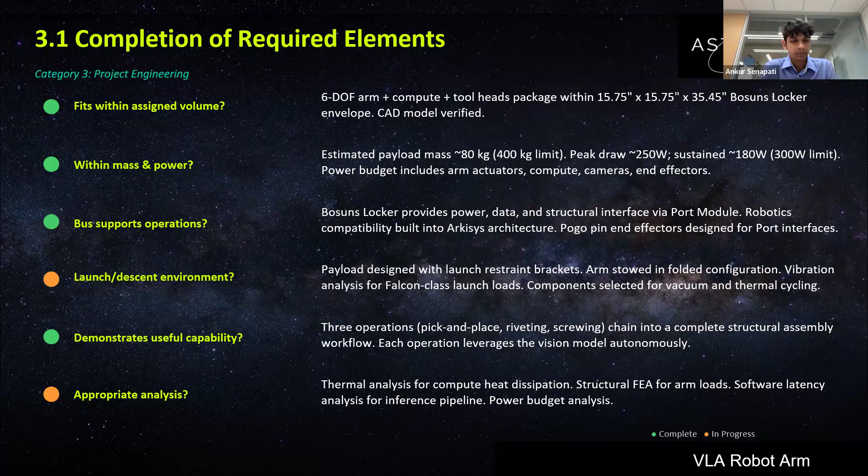Now, if we look at the broader technical impact, this mission represents a shift towards persistent orbital operations. By removing the need for constant human-in-the-loop control, we enable a level of autonomous assembly that simply hasn't been possible with traditional teleoperation. What's particularly valuable here is that our framework is platform agnostic. Because the intelligence is software defined, it can be deployed on existing robotic arms. This means we can give current servicing vehicles advanced assembly capabilities through a software upgrade rather than a hardware redesign, which has the potential to save millions in development and launch costs for legacy systems. Next slide, please.

Now, our core innovation lies in the first ever application of foundation vision models, specifically the VLA and LLaVA class architectures, to ISAM assembly. Current on-orbit systems are almost entirely dependent on pre-scripted motion or direct teleoperation. We've moved beyond that by allowing the robot to reason about its environment in real time. We've also decoupled the intelligence layer from the hardware, so the same model can be reused across different missions and arm configurations with minimal retraining. Furthermore, our natural language interface allows a mission controller to direct complex sequences in plain English rather than programming joint trajectories, significantly lowering the barrier for operators. Next slide.

Now, this capability is designed to advance COSMIC's highest priority missions. By mastering the chain of picking, placing, and fastening, we provide essential toolkits for missions like autonomous payload swaps on platforms like the Arkisys Port. Our framework also scales to assembly of large modular structures and the on-orbit replacement of outdated instruments on client satellites. Essentially, we are providing a bridge for the ISAM ecosystem to move from one-off technology demonstrations to a future of routine modular spacecraft assembly and servicing. Next slide.

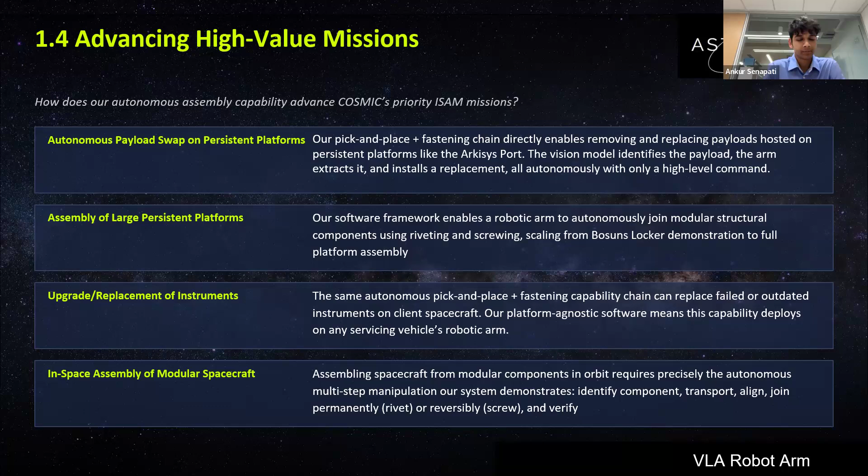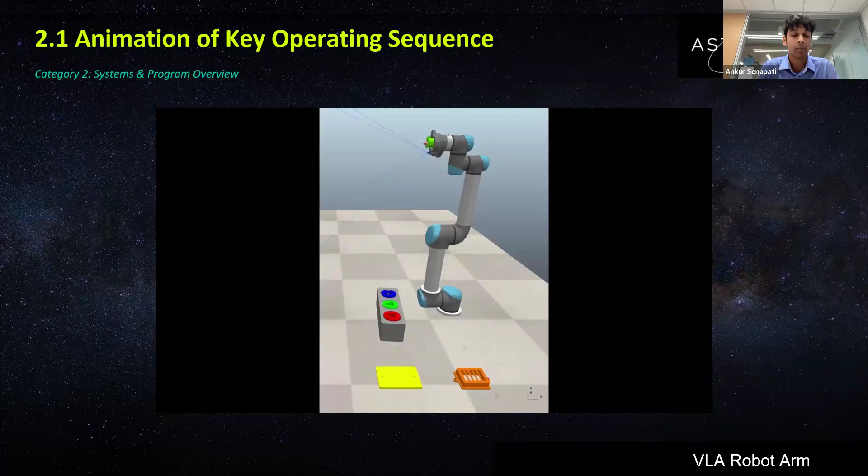Now, the only thing with this is this removes the natural language component that we wanted to strive for in our system. And it's not quite software agnostic. And so for that reason, we decided to continue with VLA and LLaVA. And as we saw in the simulation video, it is completely feasible.

Now, VLA does require quite high hardware, like it requires around 10x compute costs compared to DINO, for instance. But LLaVA is a much smaller version. It's much quantized, and it removes most of the backbone architecture that we don't need in traditional VLA methods, which is why we went forth with the VLA method and more specifically with the LLaVA method, because it's optimizable and much easier to run on space-grade hardware.

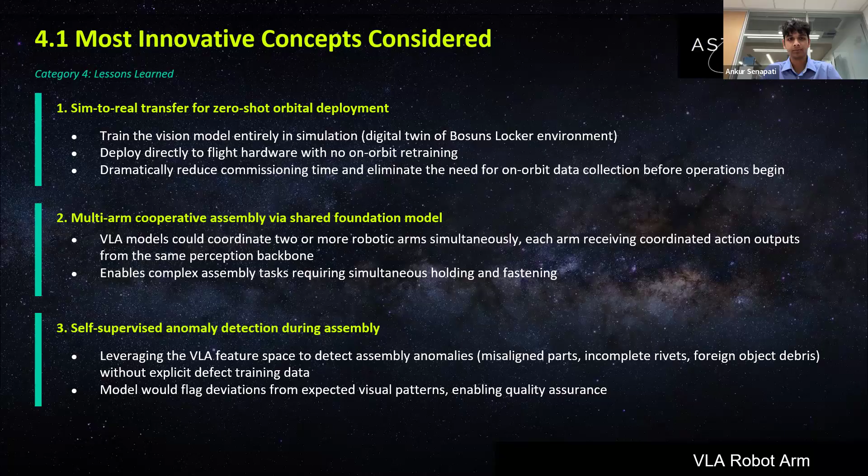While some of our concepts are ambitious, we have identified some critical technology gaps that must be addressed to make this a reality. First is the lack of space-qualified ML hardware. Right now, there aren't radiation-hardened processors that are capable of running transformer-based vision models at the speed that is required for real-time, safe robotic control. Closing this gap, potentially by hardening commercial edge AI chips like those from NVIDIA, is important for the future of AI-driven space robotics.

Another hurdle is the hardware standardization. Specifically, we need standardized robotic tool change interfaces for microgravity. Currently, there is no universal quick change port designed for orbital arms. Standardizing these connections is necessary for the ISAM ecosystem, allowing for modular and serviceable spacecraft, which we all want to see. Next slide.

Now, of course, development hasn't been without its challenges. The first wall we ran into was compute feasibility. Early benchmarks show inference times of 2 to 4 seconds per action, which is far too slow for dynamic orbital tasks. While we evaluated lighter alternatives, we found that the superior language grounding of the VLA architecture is what makes the complex reasoning possible. This reinforces our priority: we need better space-hardened hardware.

The sim-to-real gap also remains a persistent challenge. Even when a model is perfect in simulation, things like lighting reflections and texture discrepancies on a physical testbed can cause issues. We've mitigated this by using domain randomization, but it is a primary risk factor as we move towards flight.

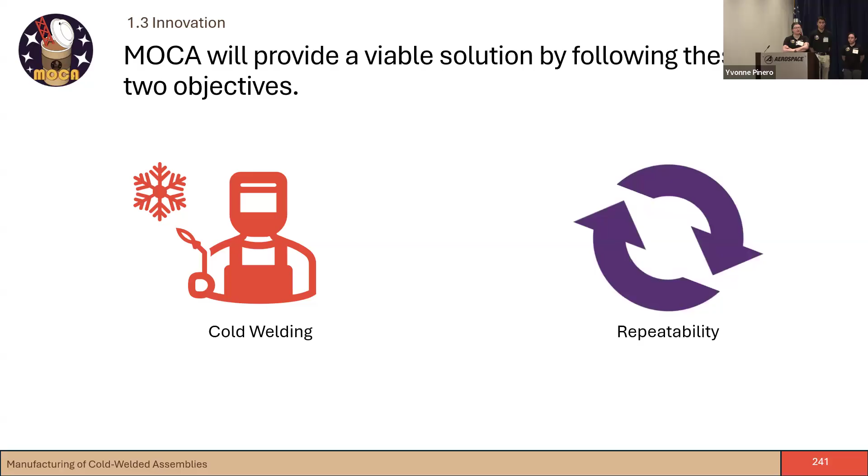Our second objective is repeatability. We want to be able to create more than one joint with our system, so that we can actually use it more than once.

So what does the overall concept of operations look like for MOCA? First, we want to launch MOCA alongside materials, either in the same launch or separate launches, depending on wherever we are in the mission. Next, we will have a rendezvous operation where MOCA links up with the raw materials in space.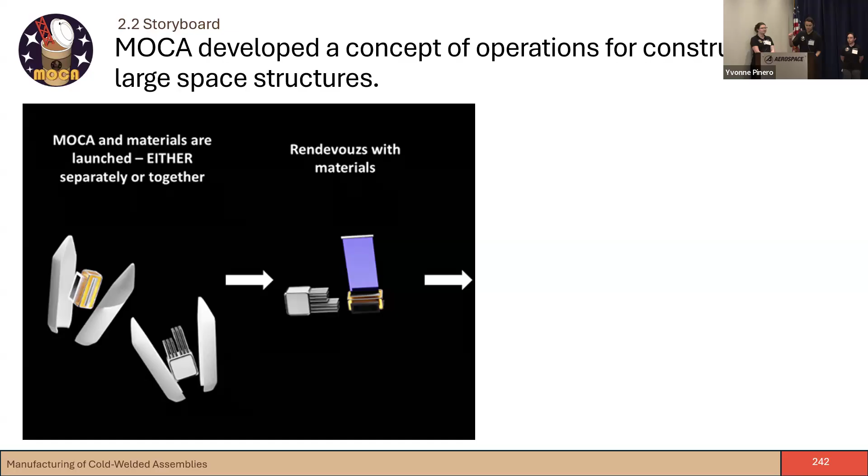Then MOCA will take those raw materials and start fabricating a truss structure for whatever purpose the client deems necessary. And then for end of life, MOCA will be deorbited and will burn up in the atmosphere.

All right, so taking a closer look at the third aspect of that, how are we actually going to create truss joints?

First, when we rendezvous with the raw material, we will have the raw material provided. In this case, we are designing around aluminum 3003, a more malleable aluminum. Then we remove any contaminants by scraping off any oxide that might have formed on the aluminum members between when it was launched and when it is intercepted by MOCA.

Then we will have two of these cleaned members aligned in a certain orientation to create a joint. For the final step, we apply a force that forces these cleaned metallic members to bond together using cold welding.

There were three main trade studies that directed our whole design. The first is our pressure mechanism—how we apply that pressure. After the trade study, we came up with two solutions: an electromechanical screw and an electromechanical spring. We also looked at solenoids, pneumatics, and hydraulics. We ended up choosing the electromechanical screw because it was simpler than a spring, and springs come with safety concerns, especially with huge amounts of force behind them after winding up. So we went with the electromechanical screw paired with a lever to amplify the force generated by our motor.

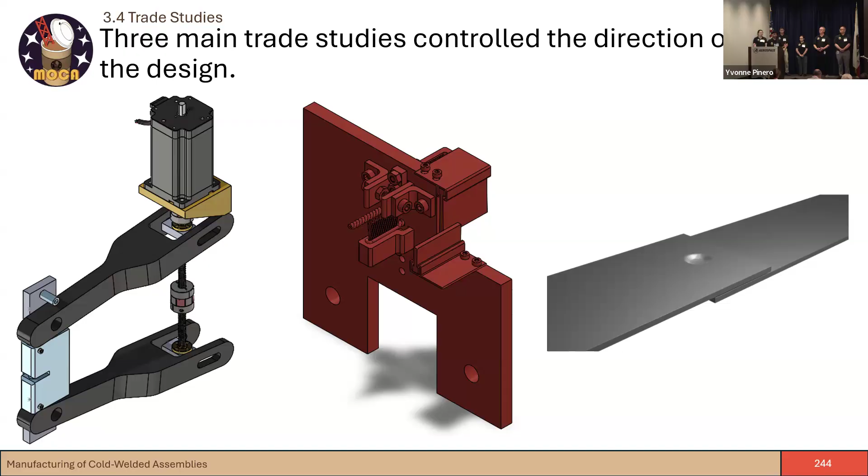Second was our cleaning mechanism, where we had to figure out how to get rid of the oxide layer. We ended up going with an abrasive wire brush instead of a belt sander, because our mechanism already has a conveyor belt on the bottom that takes a sample from one end to the other. There's no point adding a second conveyor belt with a sander on top, so instead of that extra complexity, we used a stationary abrasive wire brush to keep it simple.

Our last and arguably most important trade study was our joint. We chose a lap style joint instead of a butt joint because simplicity was a huge part of our decision making. Although you can do more with a butt joint in terms of angles and shapes, since we were doing a very straightforward joint, we decided to go with a lap style one.

All right, yeah, so we're going to dive into the alignment mechanism first.

So the point of this mechanism is to take it first through the cleaning mechanism and then into the pressure mechanism. Here, first the members are put into our carriages, both left and right, and from there they are pushed through our cleaning mechanism and go through multiple passes until the oxide layer is removed.

There's also a cam that you can kind of see, it's a little wedge. The point of that wedge is to cause an overlap of the members after they pass the cleaning mechanism.

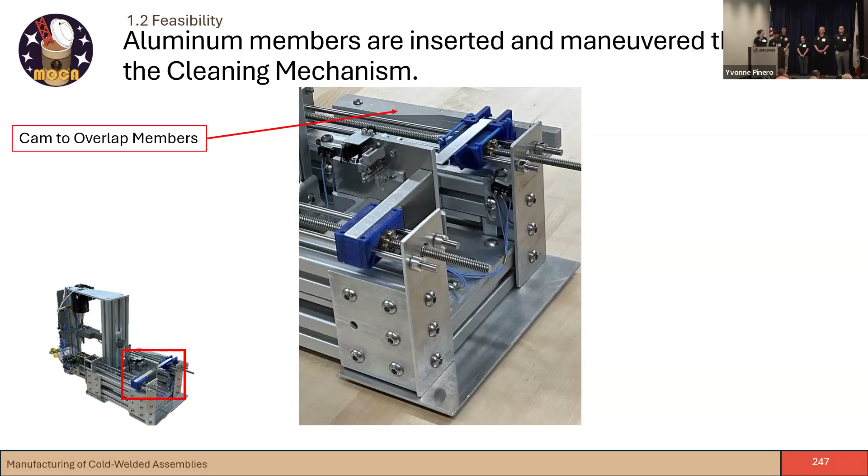Here is a better view of what the cam looks like. We have a bearing that rubs on that cam and causes cross movement, and after it passes the cleaning, it causes that lap style joint when it enters the pressure mechanism. The alignment mechanism is basically run by two motors.

These are two NEMA 17 stepper motors that we're using to control the movement of the carriages. As they rotate clockwise, they'll go towards our pressure mechanism, counterclockwise the other way.

We have two limit switches, one at the very start, which is our homing position, and then one at the very end. That signifies that we reached our pressure mechanism and we're good to start applying our pressure.

As for why it's important to remove the oxide layer, when you remove it in the cleaning mechanism, it allows the two metal members to create a stronger and cleaner weld. Since it's in vacuum, it will not have that oxide layer grow back, which allows the cleaning mechanism to take advantage of the exposed metal members and begin to create that weld.

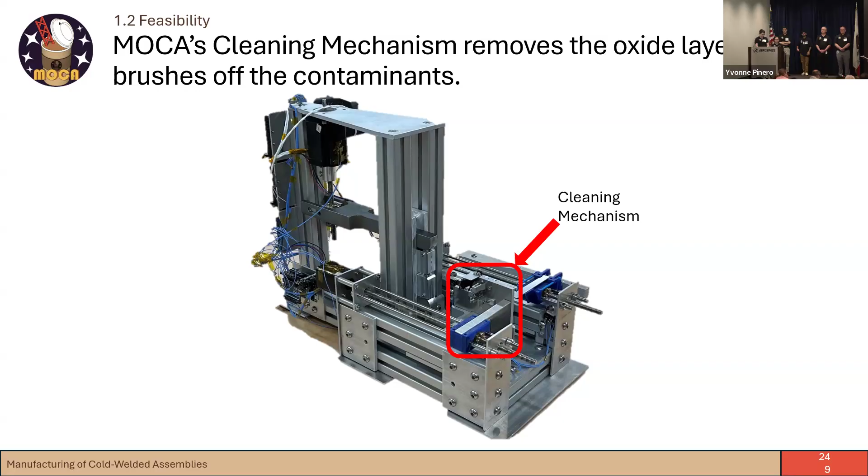So to actually remove the oxide layer, you can see the cleaning mechanism up on the screen. We use abrasive wire brushes to scrape the oxide layer off of the aluminum members.

And the nylon cleaning brush then removes all of that scraped off oxide layer and prevents any of that debris from staying on the clean surface.

So after the alignment mechanism brings the weld samples through the cleaning mechanism, it brings it over to the business end of the system, which is the pressure mechanism, the large vertical structure.

Here we can see a close-up where the action actually happens, the crimper head. It's between the two vertical extrusions there.

What that contains is two pins that press down on the overlapping samples in such a way as to cause enough plastic deformation that you get diffusion, atomic diffusion where the metal atoms actually pass through each other, even if there's a little bit of some oxides left on the surface.

That jaw right there is where the samples actually slide into for that pressure application to happen.

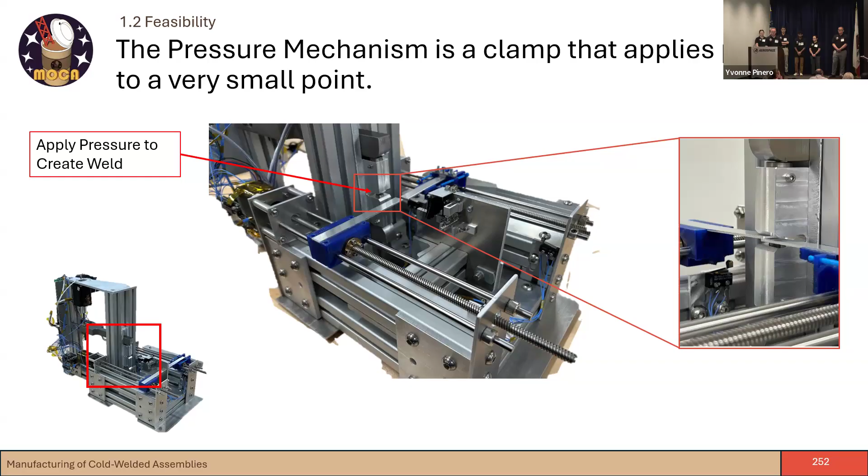And here is an example of the electrical subsystem. So outside of the chamber, we're going to have a separate harness, and then MOCA itself, inside the chamber, is going to have its own harness, and they're going to connect to each other through a 25-pin connector that is on a bulkhead on the vacuum chamber.

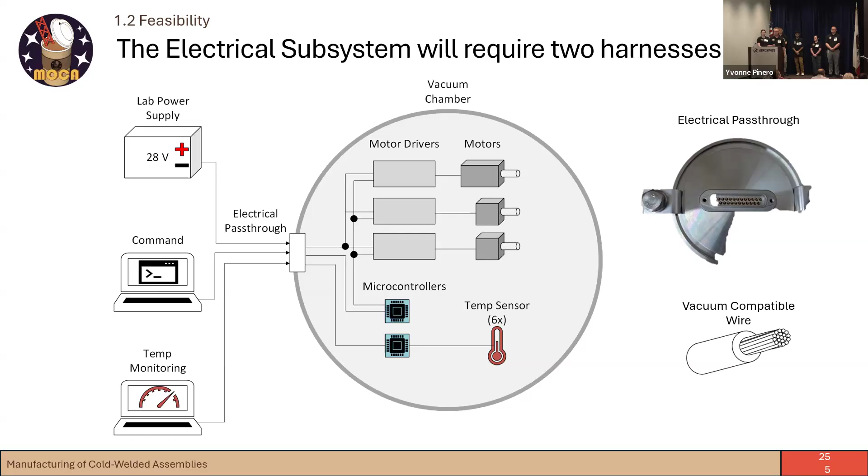As for MOCA's control software, MOCA will be using the I2C, or inter-integrated circuit, data protocol to gather the data from the temperature sensors, the limit switches, and the motors. So that way someone can manually input those commands to initiate the cold welding process, to ensure that MOCA is a semi-autonomous system. And the code was written in Arduino IDE. Next slide, please.

So as Daniel mentioned previously, one laptop will be inputting that command into the serial monitor. We'll be posting the data onto the serial monitor with the timestamps, so that way the observer can also track what is happening in MOCA and where the system is at. Next slide.

Okay, so during our design process of creating MOCA, we explored many different innovative ideas. Next, please. First and foremost, the biggest thing that we've designed this entire project around is cold welding. Cold welding is typically a very annoying process that happens in space where our moving joints just start to freeze up and we can't use them anymore. But we wanted to take that process and use it for a constructive purpose. And so that's why we created MOCA.

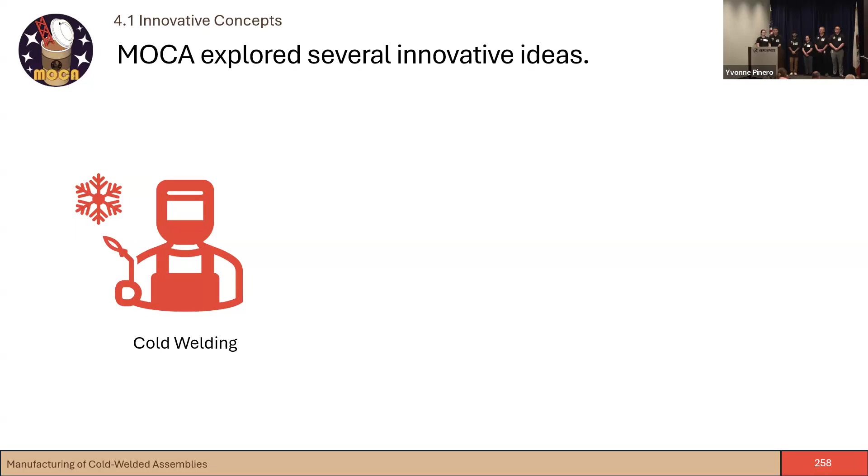Next, please. And when we were going through different ideas for how to remove the oxide layer off of our aluminum members, we briefly discussed the use of laser cleaning. This was an interesting process that we would have loved to explore. Unfortunately, due to budget and time constraints, we were not able to implement this into our design. Next, please.

We also went over some ideas about communication using lasers. This would help greatly with data transfer rates and how we would actually communicate from ground to MOCA out in orbit. Unfortunately, we also could not explore this due to time and budget constraints. Next slide, please. So MOCA was designed as a demonstration of this orbital cold welding process that we could potentially use to construct space trusses. Next, please.

But in order to create an actual product that will be widely used in space, we need to adapt our pressure mechanism to accommodate the more commonly used materials for space applications. Currently, we have designed around aluminum 3003, but if we wanted to move to a more traditional aluminum 6061, we would have to upscale our pressure mechanism in order to apply enough pressure to get the plastic deformation, force those metal atoms together, and create the bond.

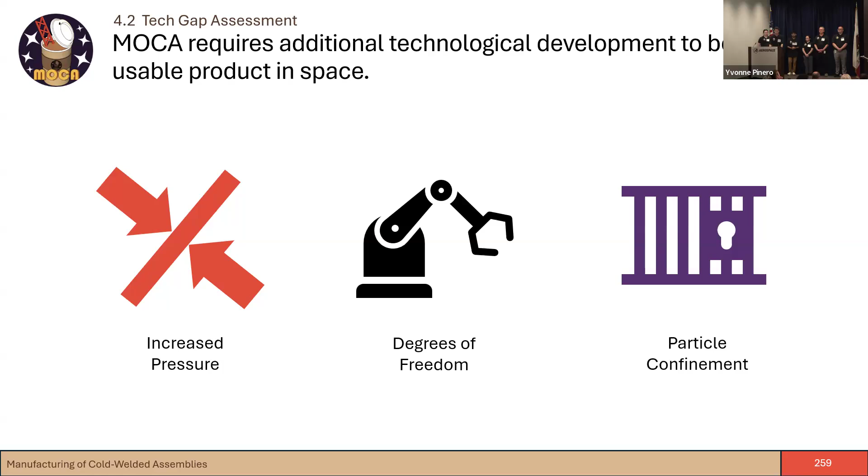In addition, we faced many challenges in the development of MOCA. First and foremost is the manufacturing challenges. During our design, we made many design choices that we thought would work, and it looked like it would work in the CAD, but it turned out when we actually created a prototype, it did not work as we intended.

For instance, with this plate depicted here, we intended to use countersunk screws to keep the plate flush with the ground. Unfortunately, the plates were not thick enough to prevent these screws from protruding through the plate and causing several stress points to form on the bottom of our extrusions. So to fix this, we switched to button head screws and washers in order to help support that better. Next, please.

We also needed to come up with a way to determine how well our cleaning mechanism worked. There's not really much data on how well one pass through the cleaning mechanism, or how many passes of a brush it takes to remove an oxide layer. So to solve this, we decided to mark our members using Sharpie or Dykem, and then pass it through the cleaning mechanism and see how much of that layer it removes and how many times we would want to pass it through in order to completely clear out that area. Next, please.

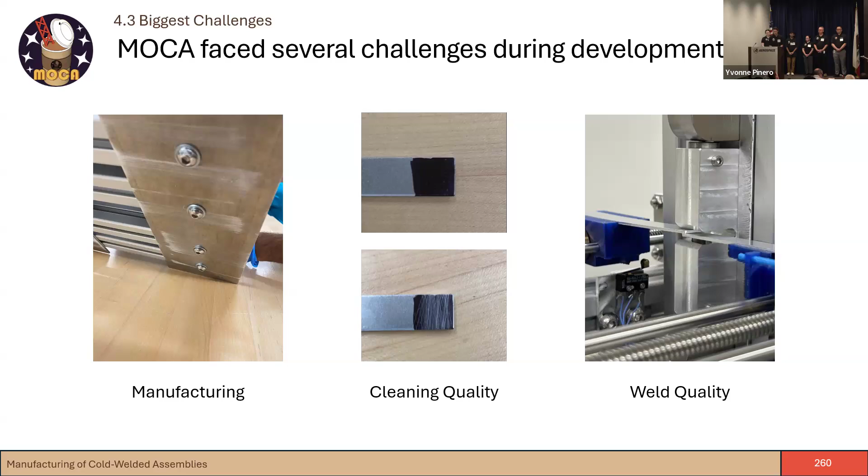Next slide, please. Due to the prototype being near to being finalized, we will perform thorough testing to get to the preparation for the PDR. As a team, we've come up with 8 or 9 verification plans, and we are going through most of the verification plans recently. Major ones that we've recently done are the metric sizing, so we wanted to make sure it could fit in the bosun locker, and the weight measurement. And we also would like to run the code and make sure the code runs properly. Next slide, please.

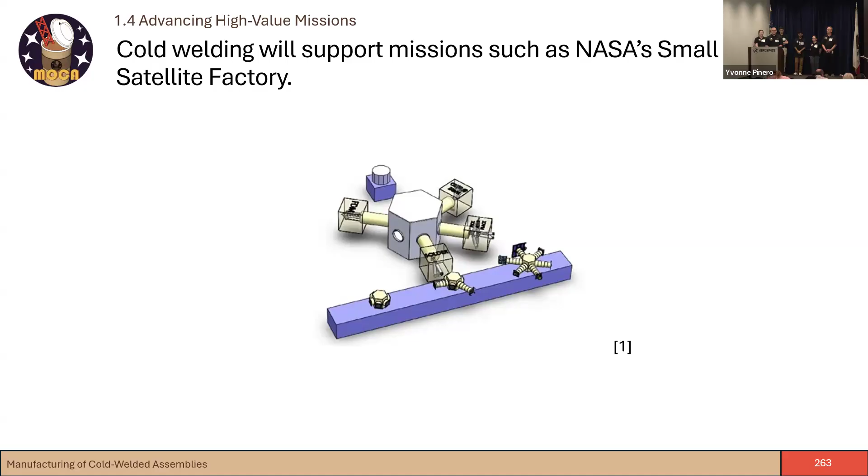And if you would like to have more details about our project, we did create a paper with a 230-word abstract. It's 10 pages, 2 references, and we are proposing to publish this at AIAA SciTech Forum. Next slide. In conclusion, MOCA plans to help enable the construction of cold welded truss joints while in orbit. Next, please. Thank you. Are there any questions?

Okay, are there any questions from the judges in here? Okay. And I got one. Go ahead. Jacob, this is Andy. So some pretty impressive hardware. Did you guys design it and build it yourself, or did you get help?

So Embry-Riddle does have machinists on staff that did help us do the manufacturing. We did design all of the CAD parts ourselves. We purchased the extrusion, it's 4040 extrusion. But all of the other parts we did design and we did have some help manufacturing those from the machinists on staff. So you actually built the CAD files to come up with a configuration and just sent it out to have them, and everything fit together first time?